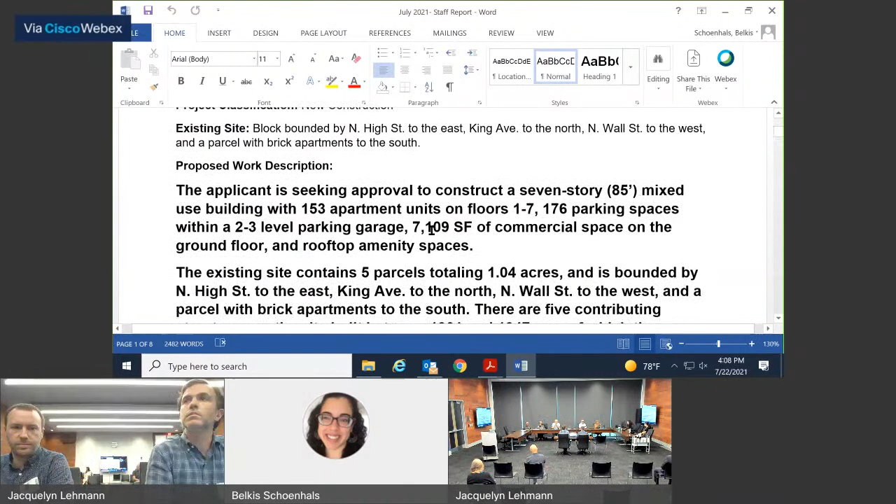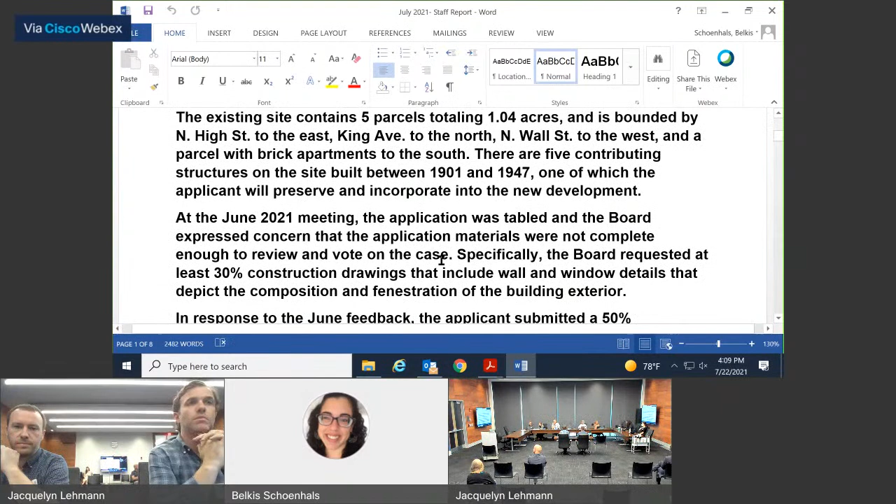So for this case, the applicant is seeking approval to construct a 7-story, 85-foot mixed-use building with 153 apartment units on floors 1 through 7, 176 parking spaces within a 2 to 3 level parking garage, 7,109 square feet of commercial space on the ground floor, and rooftop amenity spaces. The existing site contains 5 parcels totaling 1.04 acres and is bounded by North High Street to the east, King Avenue to the north, North Wall Street to the west, and a parcel with brick apartments to the south. There are 5 contributing structures on the site built between 1901 and 1947, one of which the applicant will preserve and incorporate into the new development.

At the June 2021 meeting, the application was tabled and the board expressed concern that the application materials were not complete enough to review and vote on the case. Specifically, the board requested at least 30% construction drawings that include wall and window details related to the composition and fenestration of the building exterior.

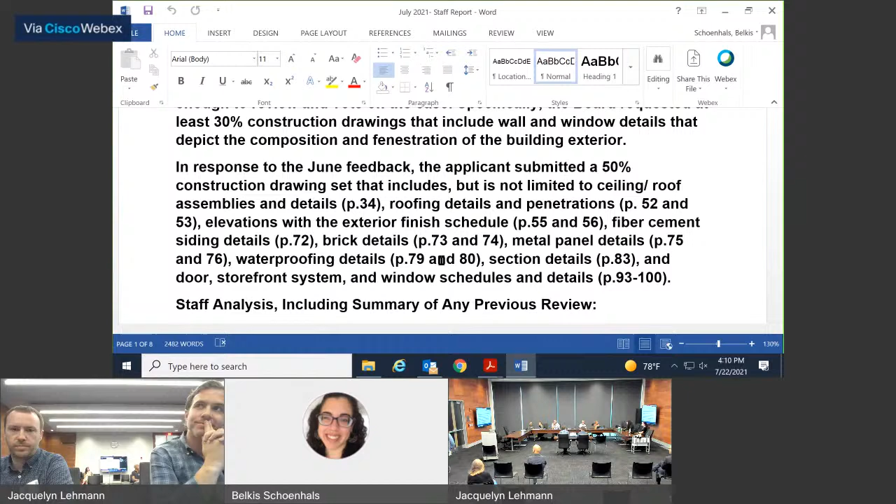In response to the June feedback, the applicant submitted a 50% construction drawing set that includes but is not limited to ceilings, roof assemblies and details, roofing details and penetrations, elevations of the exterior finish schedule, fiber cement siding details, brick details, metal panel details, and waterproofing details, section details, and doors, storefront system, and window schedules and details.

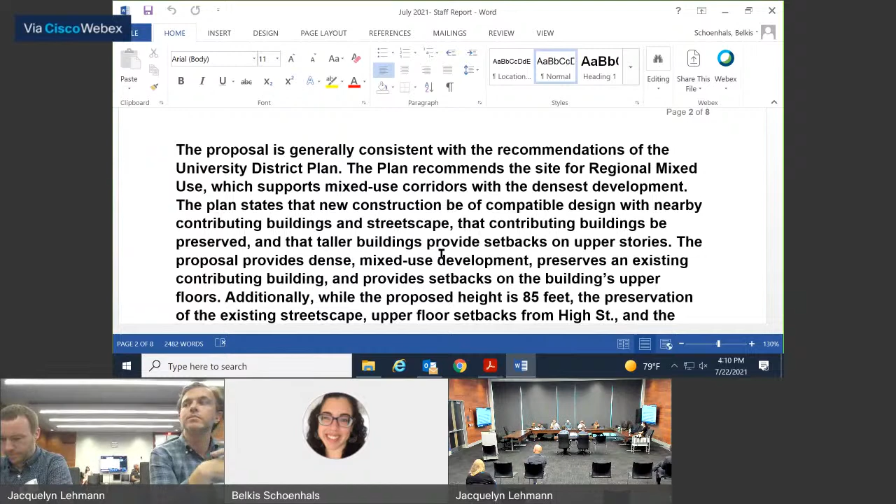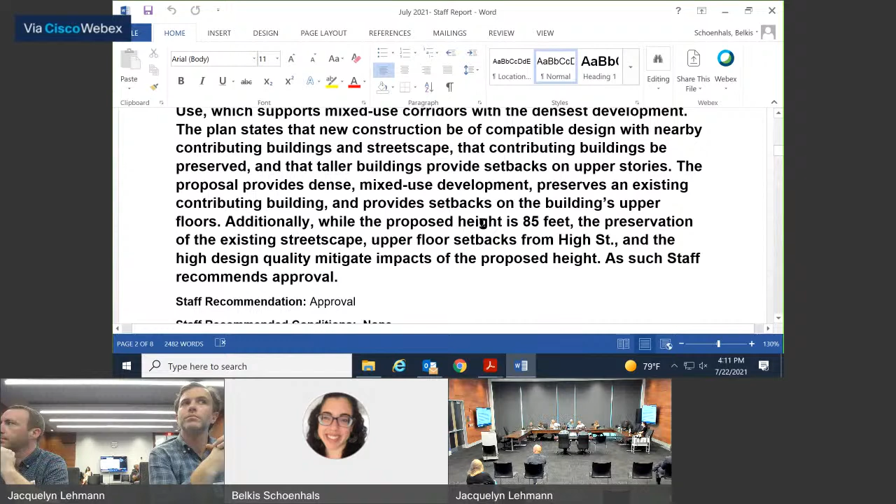After review of their 50% construction drawing set, the proposal is generally consistent with the recommendations of the University District Plan. The plan recommends regional mixed use for this site, supporting mixed use corridors with the densest development, and states that new construction be of compatible design with nearby contributing buildings and streetscape, that contributing buildings be preserved, and that taller buildings provide setbacks on upper stories. The proposal provides dense mixed-use development, preserves an existing contributing building, and provides setbacks on the building's upper floors. Additionally, while the proposed height is 85 feet, the preservation of the existing streetscape, upper floor setbacks from High Street, and the high design quality mitigate the impacts of the proposed height. As such, staff recommends approval. Thank you.

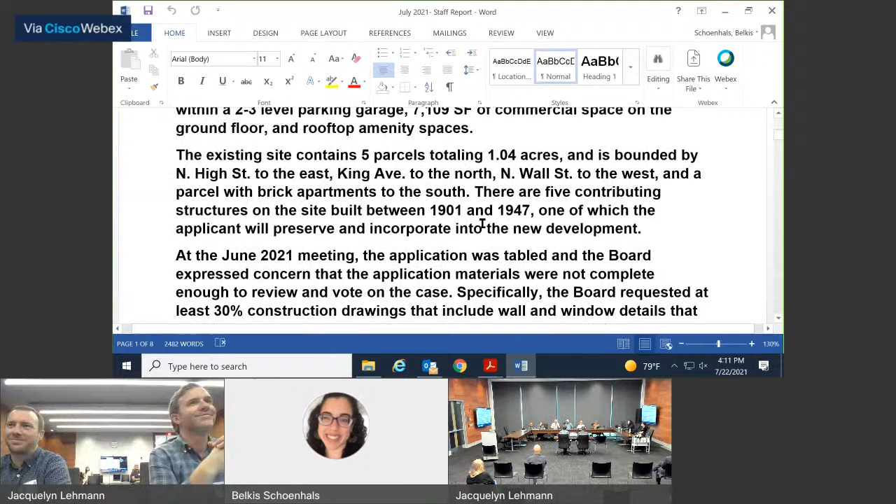What I would do right now is ask the applicant to show us what they have added since last time, and hopefully it will be put up on the screen. If you could sort of, oh, 141 pages, yes, if you could limit yourself to the details of the exterior, per the specific request of last month, so that we don't have to go through 150 or however many pages there are here, that would be wonderful. Please. Absolutely, absolutely, complete but short.

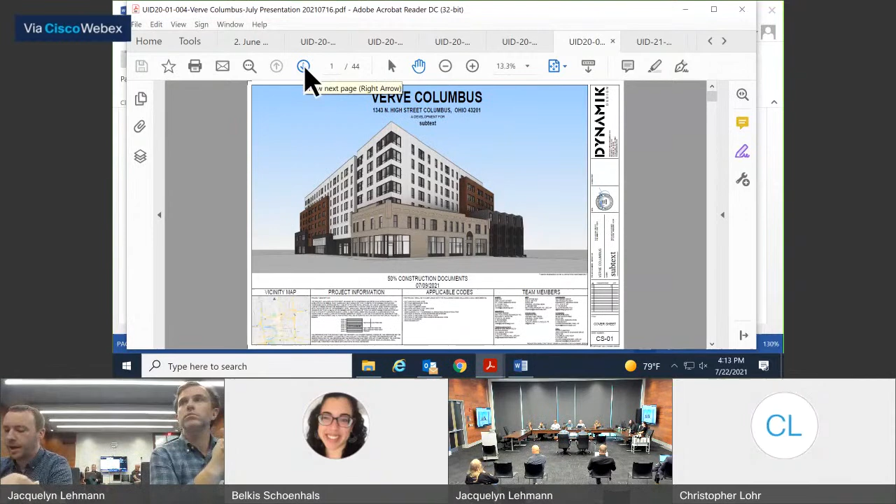Part of the challenge with assembling a presentation like this, where we're extracting the construction documents and trying to tie it into the aesthetics of what was presented before, means that we're going to be jumping around a little bit between how the set is organized. So I'll mention the page numbers, because you can just jump back and forth between them. So let's start with page 41.

Is it 41 on the construction set, or is it 41 on the presentation set? 41 on the presentation.

Just to recap the elevations, how the building is massed, where the weight of the building is with the materials, the brick, the existing building - these are the same documents that were presented before. The building facade design has not changed.

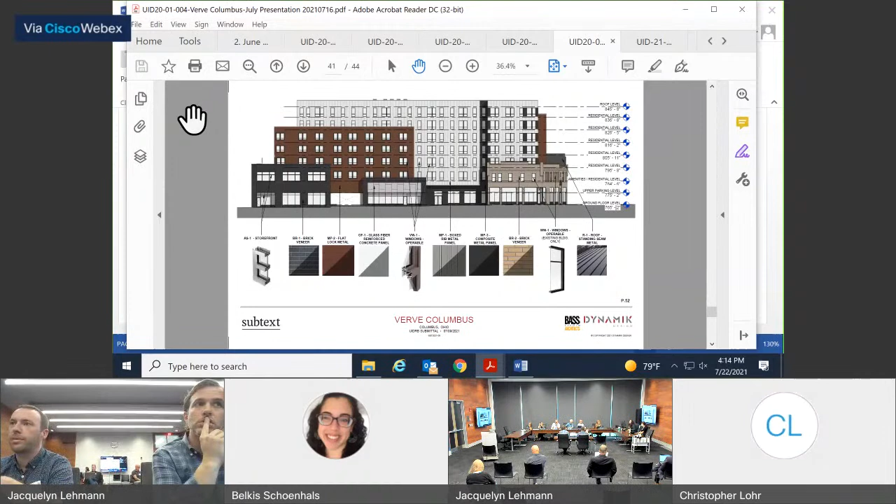If you go to the next page, you can see that's also presented before, calling out where the different materials are used throughout the project. So then if you will go back to page 15.

Which is the construction document elevations. This is the supplement that was - yes, this is the 44-page supplement.

This is Scott, I just want to clarify. So they have a 50% CD set, and just so I didn't have to scroll between 100 and whatever pages, they just extracted roughly 40 pages of the CD set. The problem is we don't have those. Oh, they're right here, and they're uploaded to Box as well. So the full construction set was uploaded to Box, and I have it here.

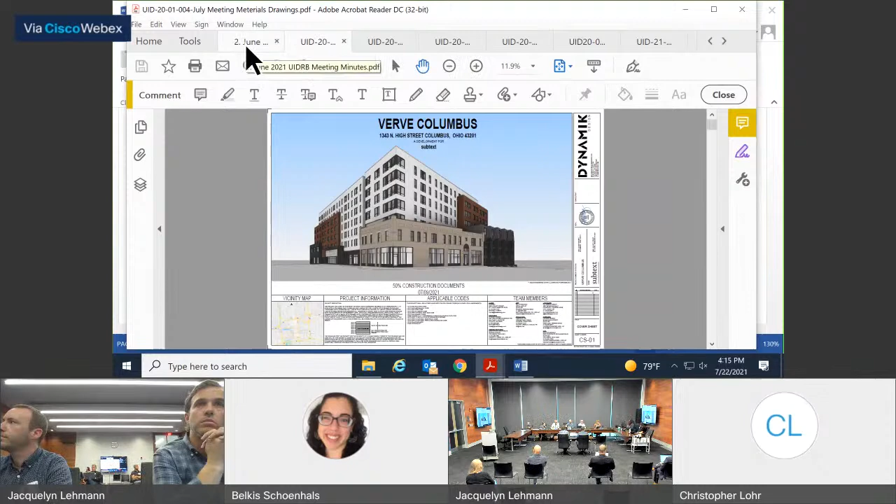What's it called? What's the file called? It should be UID dash 20, that's the case number, and then it says meeting materials. Give you the case number, so it should say UID dash 20 dash 01 dash 004 meeting materials. And that's the full construction set, but just for the purpose of today's meeting, we've extracted about 40 pages just to quickly flip through. And that's a file here also? No, it's just for use for the meeting, but there were saved pages, so you'll put them up there, right? Exactly, that's what we do.

So as I was saying, these are the construction document elevation pages, and we included them so you can see, compare between what was presented before and what we have now. They are the same building - we're not changing any of the design elements, we're just adding additional documentation.

So if you go to the next page - Belkis, that's the lighting exhibit. So go to the next page, and then that's the last of the elevation pages. So go to page 2, please.

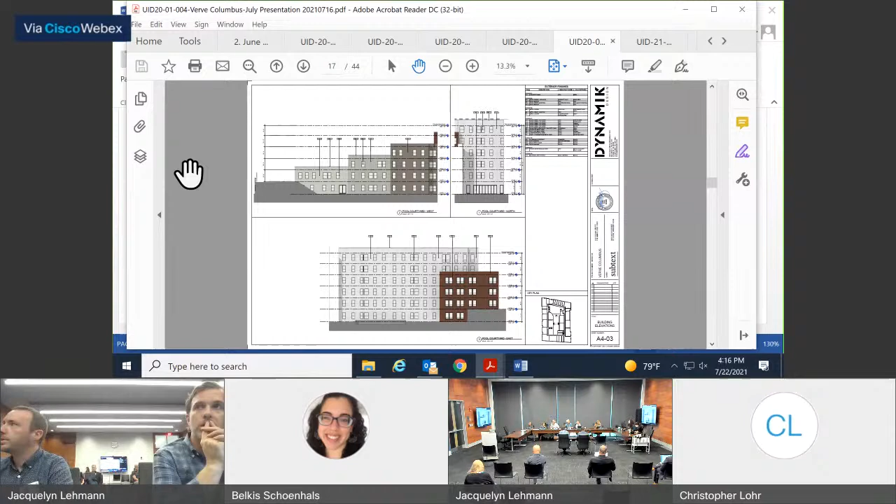What we've done is organize this - we included some of the landscape and building plans, but these are the scope of the elements that we were asked to address in additional detailing. Some of the roofing details, wall sections, including where different specific details occur, exterior material details, whether they're typical or specific to this project, and then our door, window, and storefront head and sill details. So that's what we've extracted from the overall construction document set for you to look at tonight.

So then if you'll go to page 18. In this set, we've extracted our partial elevations and wall sections from which we call out in large details of all the various penetration conditions. I think the most relevant are the ones related to the windows and material transitions. So if you'll go to page 36.

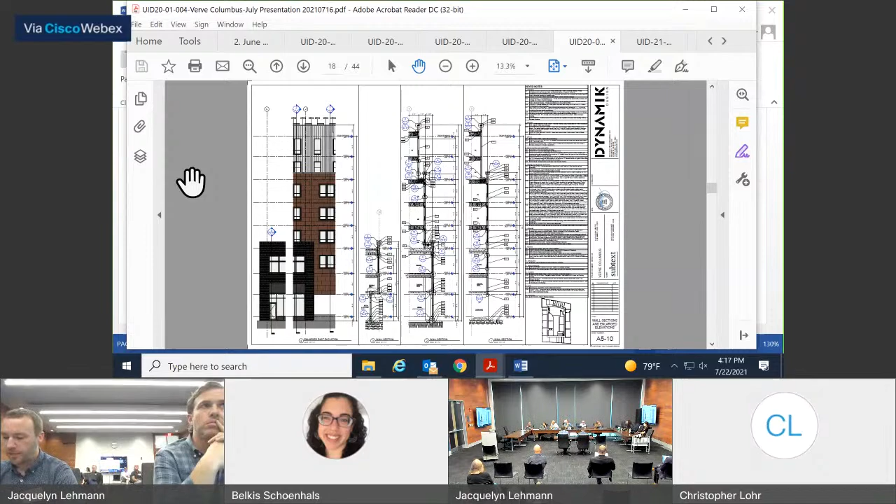Before I get into the actual details, just to orient you, because some of the numbers may be hard to read, the way we organize our sheets: when I say detail 1, 2, 3, 4, that's starting in the bottom right corner and going up the page. 5, 6, 7, 8 is the second column over, going up the page. Just a visual so you know where I'm talking about on the sheet as we go through it.

On this page, the first column on the right are our recessed nail fin windows at the brick materials, so you can see the recess with the nail fin back at the face of sheeting. Details 5 through 7 show a recess with a 2x4 furring strip to provide an additional recess for the nail flange windows at the fiber cement facade materials. Details 9 through 11 are the nail fin windows at the box rib, which is a little different, and I'll come back to that. Details 12 through 14 are the recessed nail fin windows at the composite metal panel.

So the brick detail windows are recessed, and the fiber cement and metal panel material windows are recessed. At the box rib panel, because it's a different facade material, we have more relief in the actual facade material, so the window there is not recessed as far. We've created a shadow line with a flange around the window itself to continue that same shadow pattern. But in all, the windows are recessed, with that exception at the vertical corrugated panel.

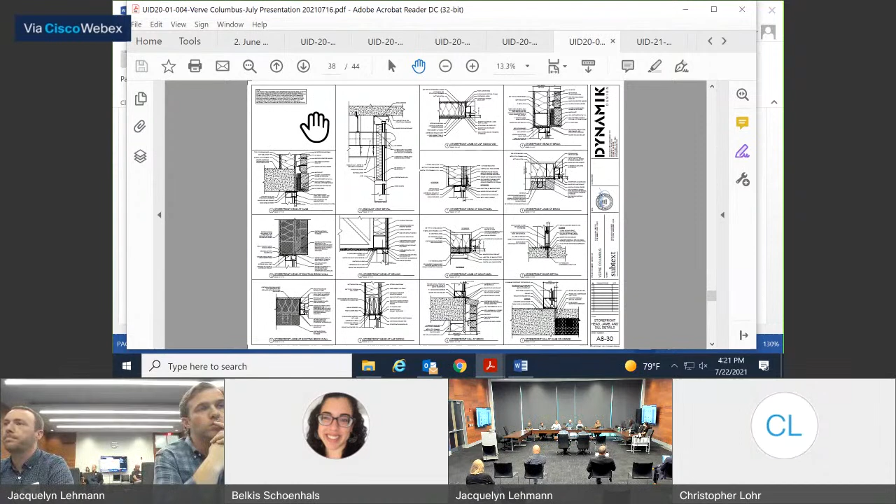A823, and I'm looking at a sill that is a 5-quarter board, appears to be on the outside. You're using cement board as a sill? Which detail is that? The one with window sill and fiber cement panel, A823. The window itself is not fiber cement, no. Well, it's called out as trim board — what is that? It's called out as trim board, but it'll be a composite material instead.

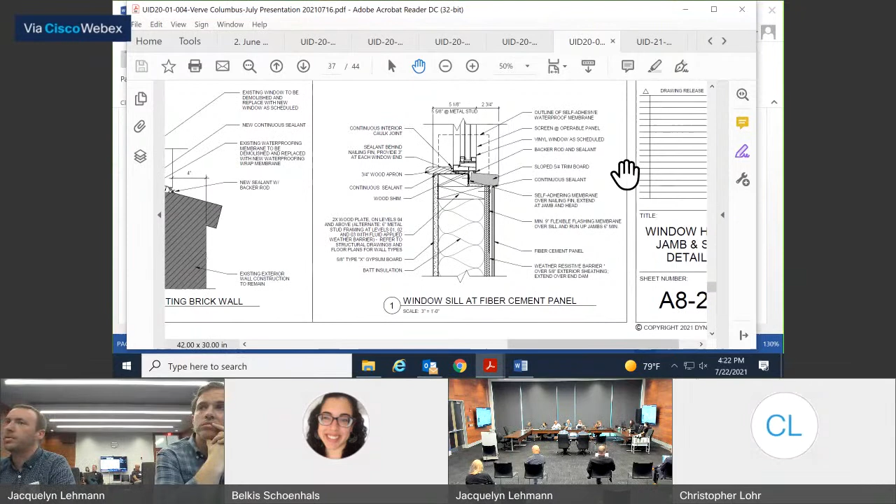Okay, keep going please. And then if we go to page 34 — that is sheet number what? That is sheet number A8-11. A8. And these are the door details showing similar recesses of the brick. We don't have very many doors, or any doors really, in the metal panel portion component, so this is to show the doors.

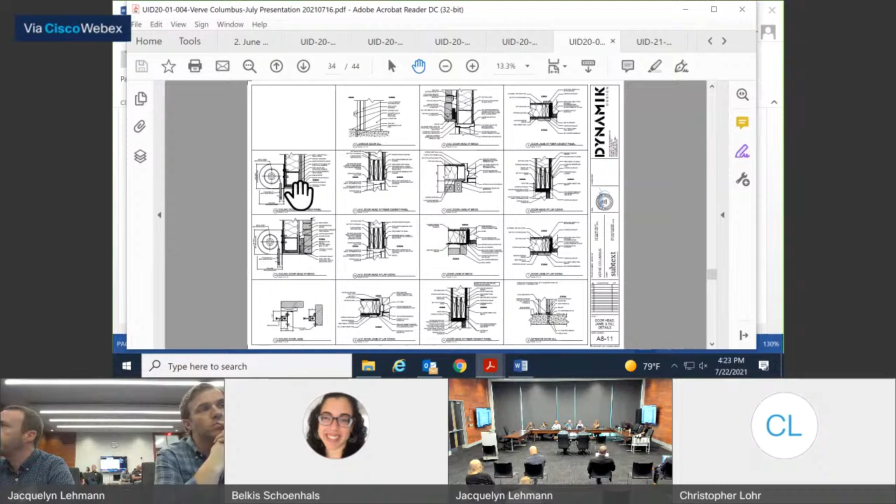Detail 15, the coiling door had an FCM panel — that's your metal panel system? That's correct. What's the gray box? At the coiling door or at the typical door? It's a fiber cement piece on the underside, so there's gypsum wrapping around the underside of the steel jamb or steel head.

Is there metal panels on the side? Yes, it's about 75%. There's the vertical corrugated metal, and then there's a flat lock brown metal panel that's in a running bond pattern, and then there's the corners.

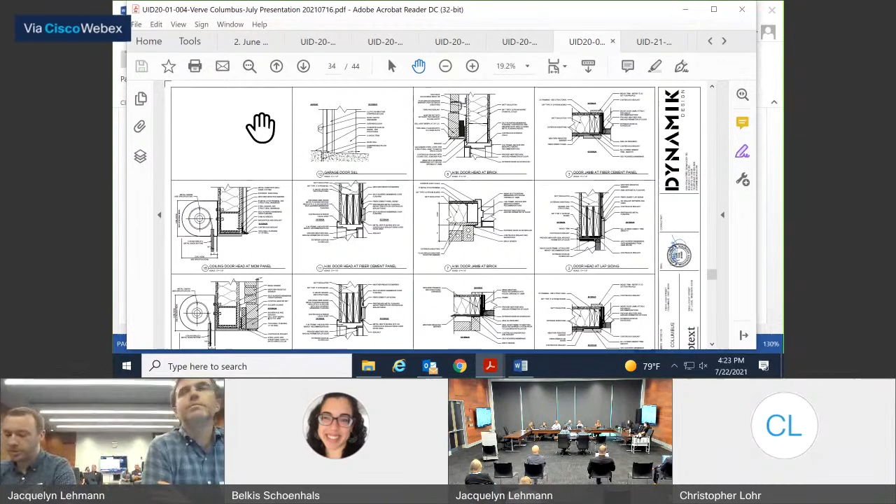Can you show us the corners? No, I'm coming to this. I was going to go into our typical material details. I just wanted to address the windows and penetrations first.

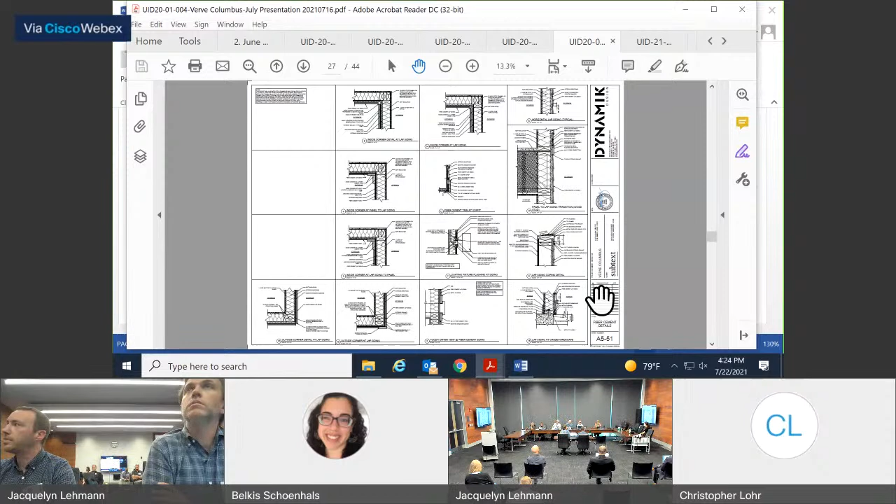If you'll go to page 27, which is sheet A5-51, yes, these are our typical fiber cement details. You can see in plan on details 9 and 10 the typical inside and outside corner. We don't have any fiber cement soffits on this, so those aren't included, but there are typical penetrations and flashing details that are for industry standards.

If we go to the next page. Hold on, outside corner detail at left side, oh it says left side. Yes, right, go ahead, the next page please.

Which is our brick details, similar approach to how the sheet is laid out and seeing some of the transitions. You'll see in the bottom left corner where brick terminates vertically against another material, how we're doing the transitions. And then also some additional breakaway details for waterproofing and patio transitions, since a number of the materials stop above grade.

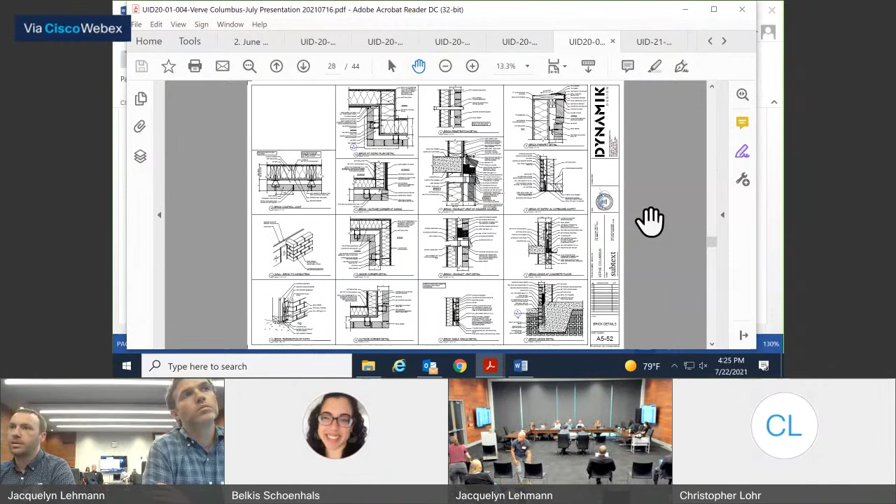If you'll go to page 30, which is A554 I believe, yes. Those are our composite metal panel details. You can see similar inside and outside corners where we have the trim piece that's by the same manufacturer as the metal panels themselves, so it's an integral assembly arrangement.

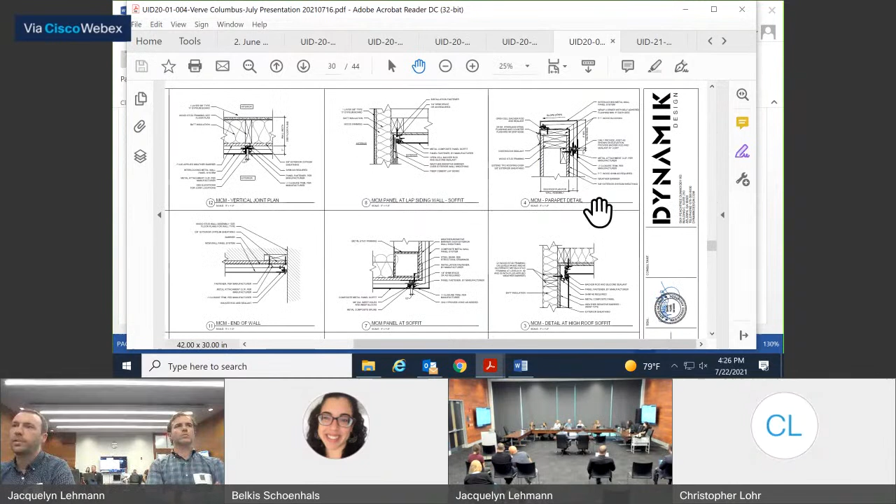In particular, I want to call out detail 4 at the top right corner of the page where we have our metal panel parapet coping. So the metal panel itself terminates at the top of the wall - it's the smooth metal panel, the darker brown, down at the bottom. Higher up where we have the box rib, we have a more conventional metal coping since there's not a way to wrap the corrugated metal and bend it around the top of the parapet.

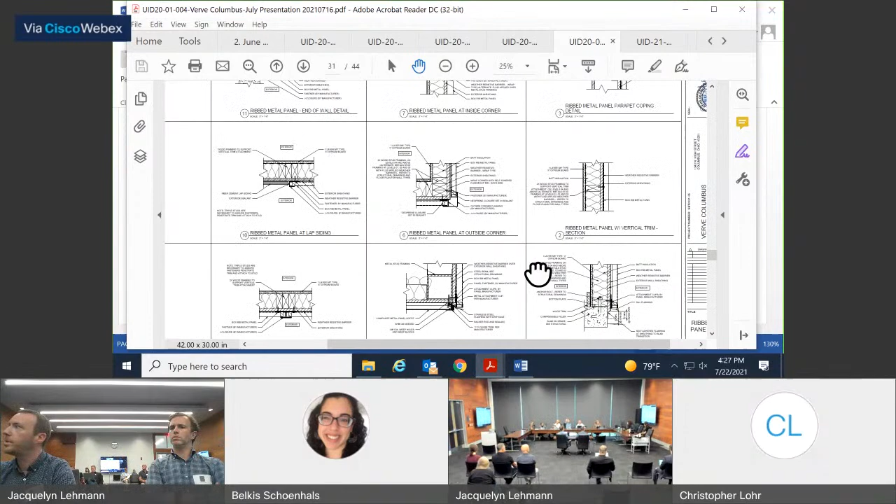And you'll see that on the next page, page 31, which is the box rib, the vertical corrugated metal panel details. Similar approach to design with the inside and outside corners. There's a prefabricated piece that terminates at those conditions - you'll see on the two middle details at the bottom of the middle column. And then at the parapet coping, the third detail up on the right column, where we have a typical metal coping to terminate the vertical corrugated beneath.

All right, so at your outside corners you're doing a piece of trim metal. That's correct, and it's in the same color and finish as the box rib.

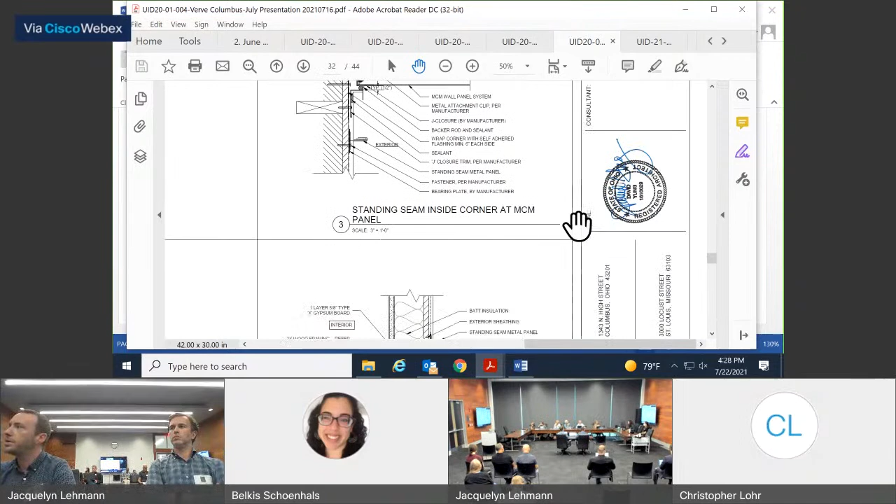If you'll go to the next page, page 32 - these are the standing seam metal roofing details that we have at the mansards over the townhomes, including the ridge and flashing details, and then typical inside and outside corners where we're making the transition to the smooth metal panel and changing the orientation because of the way the sloped pitch roof of the mansard dies into the vertical of the adjacent wall.

And then last, if we go to page 33 - there have been particular specific requests for details of how and where the planters that are on the roof facing towards Wall Street are incorporated. So the two details on the right side of the page are at the lower level, basically directly above the parking deck, where there's a cast in place structure, and they're attached to the back face of that parapet wall so that the plantings can cascade over the edge as shown in the renderings. Those are in prefabricated FRP boxes that are attached, sitting on shelves and attached to the back face of the cast in place parapet wall. Irrigation - yes, they are irrigated.

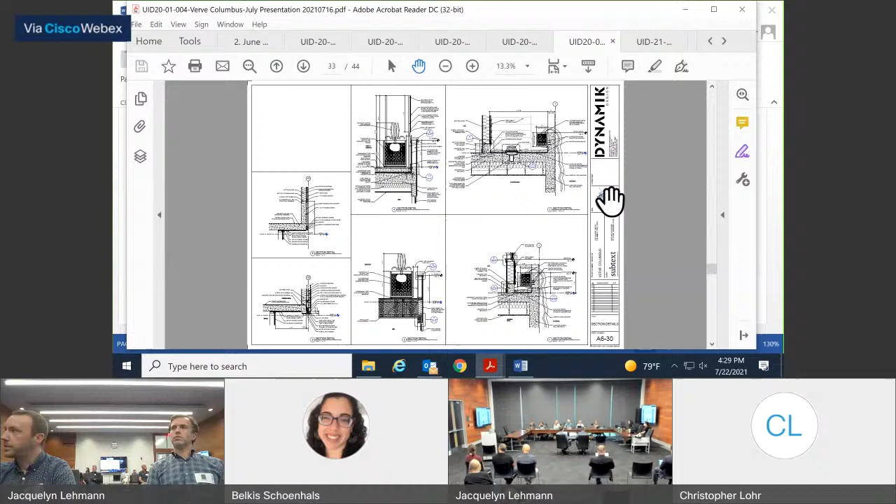And the two details in the middle of the page are the elevated roof. The one that's sitting up there has slightly larger boxes with bigger plantings in them, shrubs and grasses, and they're sitting on the split slab at level 4. Then the one below that is up on the roof that steps up vertically along Wall Street, and is carried to just above the parapet to ensure that the screening and greenery is actually visible from the street, as was shown in the renderings. If you'll pan up on the page to the detail directly above that.

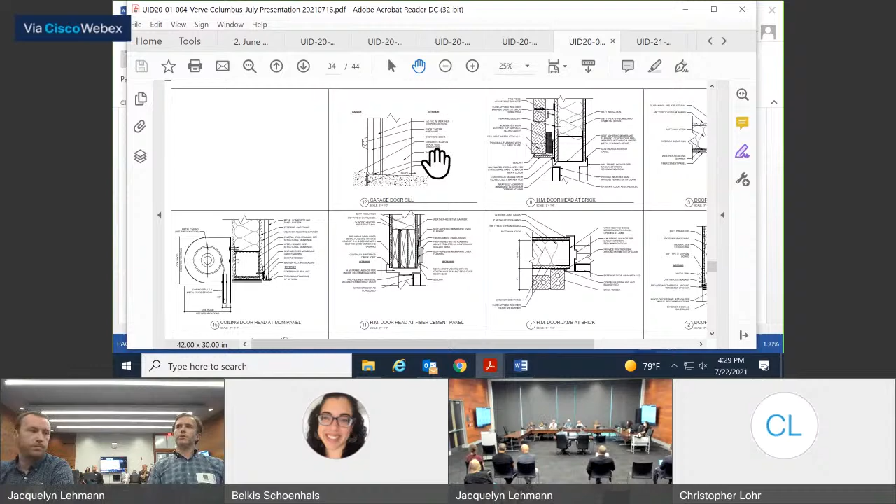And just to make a note on those, we're working with Denison Place to select plants. There could potentially be a revision just to increase restricted views into the neighborhood from the courtyard. We've also made a modification here to increase the height of that screening wall from 7 feet to 8 feet per the request of the neighborhood. As Brian was saying, it's a little thin because it's a narrow element, but just to the right of that planter you can see a detail for the perforated metal screen that runs along behind the parapet as well.

And that is the bulk of it. You're welcome to ask specific questions if you have them, I guess. Yeah, I'll have a few. I think there's a speaker on public comment.

I'm Kathy Fox, representing the Denison Place Neighborhood Association. We respectfully request that the conditions for approval of this project include the following for the outdoor amenity deck: the material for the perimeter screen should have acoustical dampening properties; the amenity deck should include the planters and screen along the west parapet wall and the south parapet wall on the amenity deck; and the plants to be installed in the planters along those same two parapet walls should be plants that will grow taller to make an effective screen. The developer has told us that these details will be included in the project, but the drawings you've seen today do not yet reflect all of these items. So we're respectfully requesting that they be included as conditions to the certificate of approval. Thank you very much for your consideration and your detailed review.

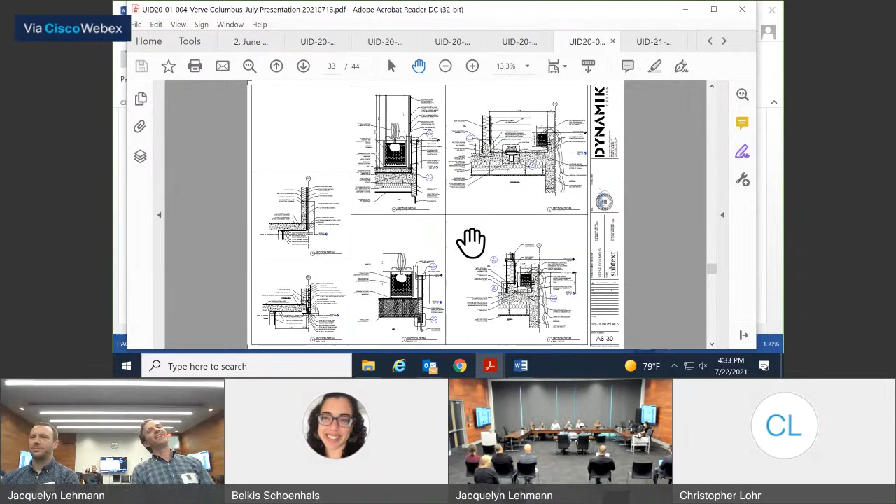And it wasn't going to be approved. I'm sorry, Frank, could you speak up a little bit? Oh, we could do that. Well, I'll do it. No, I commented to the applicant that this project started in person in this room, and that it was never going to be completed until we were back in this room. All of COVID was just waiting time till we could meet again in person. And yet in the meantime, they did a lot of work. Of course. So Frank, you're saying this project is bookended both by the pandemic and the vaccination? Yeah, that's correct, that's correct. We better approve it quickly because who knows?

Okay, so I would say our window is fast closing. I have no comments, other than that. I have no comments.

No, but the only comment slash question is the screening on the west. I have less concern about because if you look at what's occurring across the alley to the immediate west, it's garages, so. But I think if the intent was to have larger stuff, and I looked at the section of the planting volume to accommodate vines, they're presumably going to drape over through the building. And I can't remember, as the building steps down, does it have a similar planting condition? So is the section on the inside similar every place? Now you've got the larger planters that sit on the deck to accommodate shrubs, but for the vines it's a smaller container, as it were. That's correct. Okay, because I'm just saying the smaller containers are not going to accommodate. Oh, the intent is just for the vines, for the smaller container. We're talking about the separation from really the south, where it'll be... It's the south, pretty much the south and the neighborhood, but on that amenity deck level.

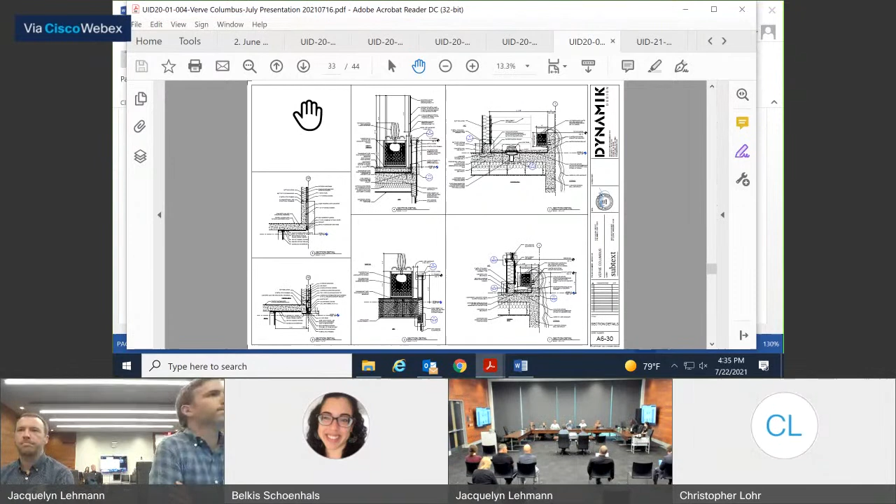Before I make the motion, Bill or Steve, do you have the text to the amendments that were passed and seemingly accepted? Yes, you do. Okay, I move that we finally approve as submitted with conditions as agreed upon between the neighborhood association and the developer.

So second. I second. All those... Carrie, second.

Then I'll call the roll. Mr. Fleming, yes. Mr. Grado, I recuse myself. Ms. Jones, I support. Mr. Petrozello, yes. And Ms. Bucksauer, yes. Thank you.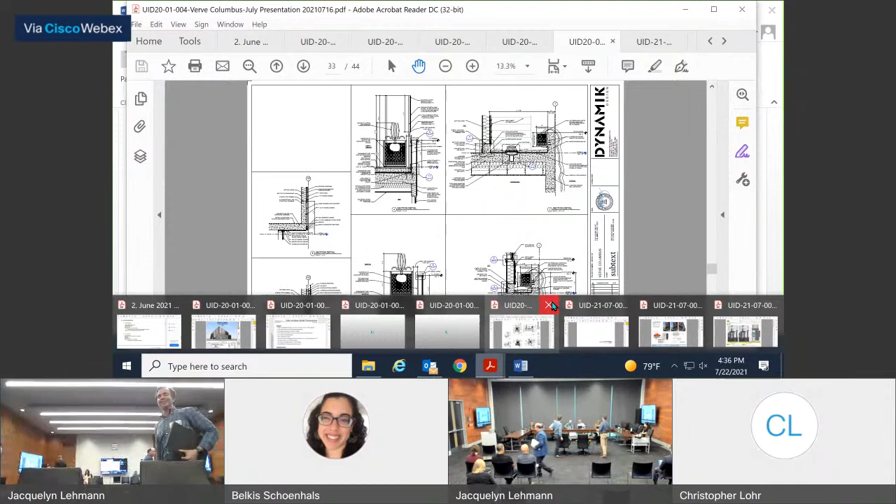Thank you all. Next project, we want it to be more efficient. It will be, I promise. We will be back. We don't want to assume that all this time was wasted in training. It was a great learning experience. So come back. We will. Thank you, everybody, appreciate it.

Mr. Hodge. Well, Mr. Hodge is not nearly as entertaining on webcam, so it's nice to be back in person. Happy to see people. I think I got it.

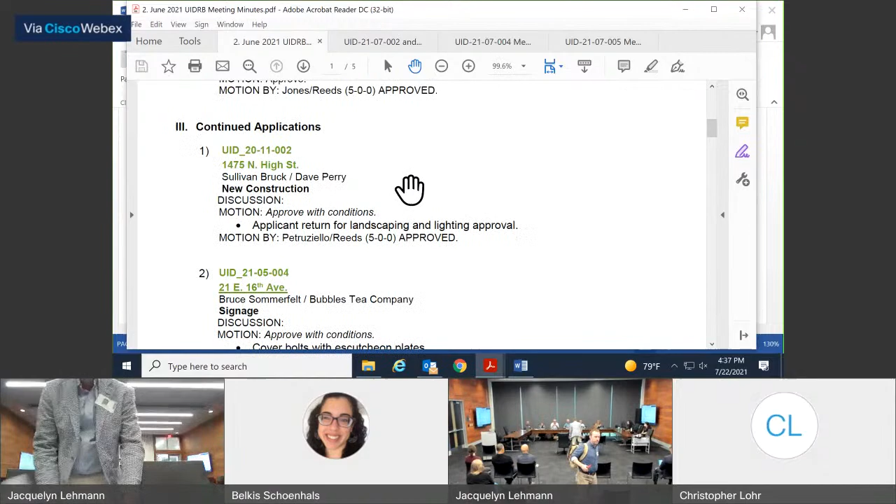All right, UID 2107-02, 13th Avenue, patio extension and variances. Help us out. And this report will also include UID 2107-03 for the design as well.

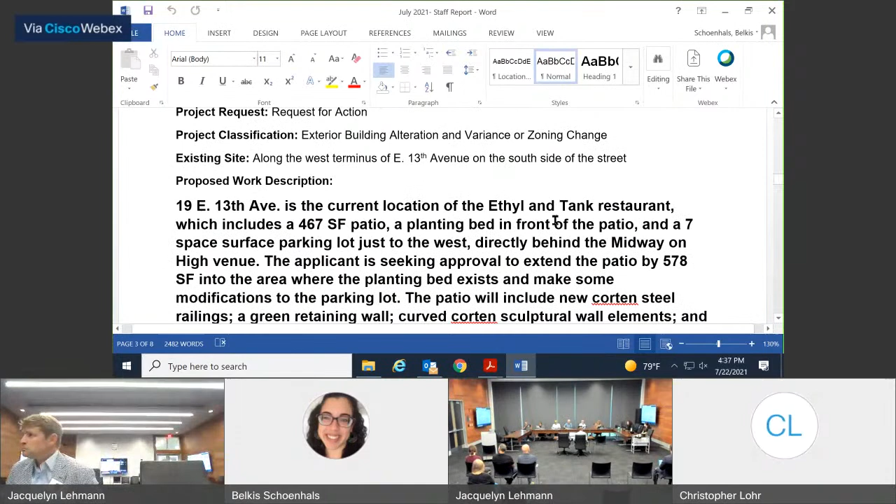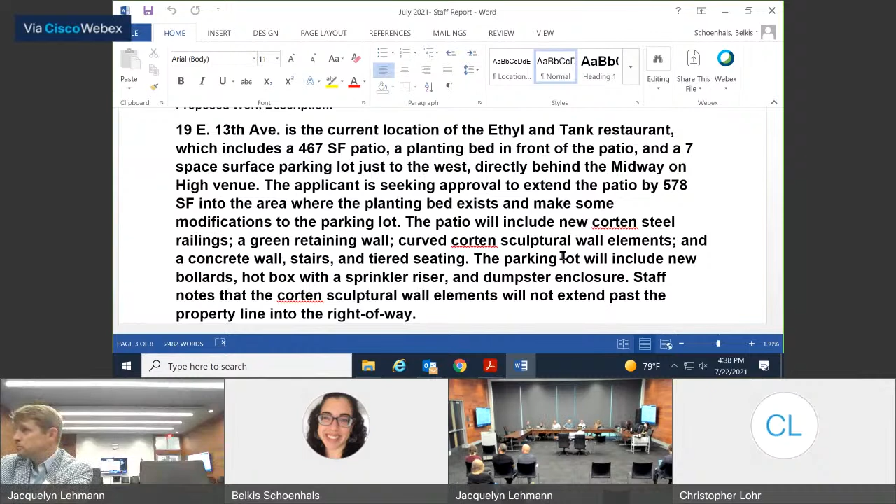So 19 East 13th Avenue is the current location of Ethyl and Tank Restaurant, which includes a 467 square foot patio, a planting bed in front of the patio, and a 7-space surface parking lot just to the west, directly behind the Midway on High venue. The applicant is seeking approval to extend the patio by 578 square feet into the area where the planting bed exists currently and make some modifications to the parking lot.

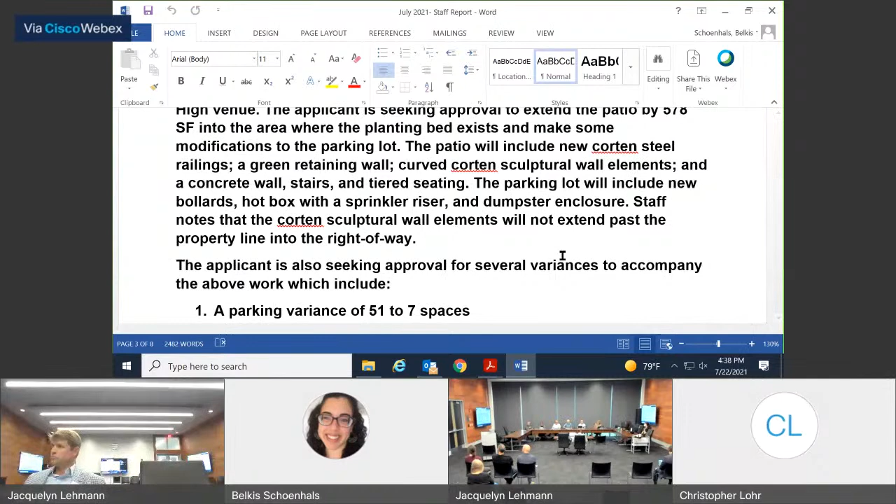The patio will include new corten steel railings, a green retaining wall, curved corten sculptural wall elements, and a concrete wall, stairs, and tiered seating. The parking lot will include new bollards, a hot box with a sprinkler riser, and a dumpster enclosure. Staff notes that the corten sculptural wall elements will not extend past the property line into the right of way.

The applicant is also seeking approval for several variances to accompany the above work, which includes: 1, a parking variance of 51 to 7 spaces; 2, reducing the loading space requirement from 1 to 0; and 3, reducing the parking lot driveway and East 13th and North Pearl Street clear vision triangles from 10 to 5 feet.

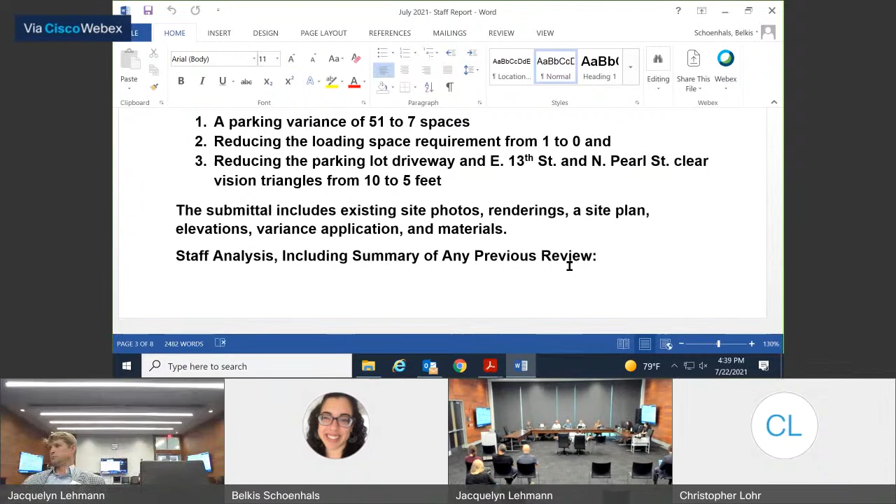The submittal includes existing site photos, renderings, a site plan, elevations, variance application, and materials. After reviewing the application, the proposal is generally consistent with the recommendations of the University District Plan. The plan recommends that development enhance the unique characteristics of the district and that outdoor dining not create visual or physical obstacles to adjacent buildings, streetscape elements, and pedestrian travel. Furthermore, the plan states that parking variances may be reviewed with consideration of the presence of on-street parking, extent of the variance requested, size and nature of use, and potential impact on adjacent residential uses.

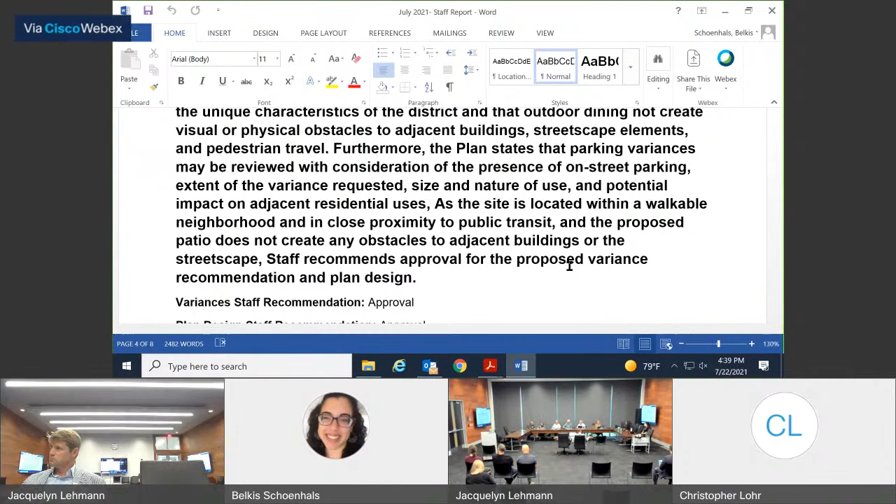As the site is located within a walkable neighborhood and in close proximity to public transit, and the proposed patio does not create any obstacles to adjacent buildings or the streetscape, staff recommends approval for the proposed variance, recommendation, and plan design.

Thank you. All right, Mr. Hodge, you want to tell us about it? Yeah, David Hodge, attorney for the applicant, and I think I'll just stand on the staff's report.

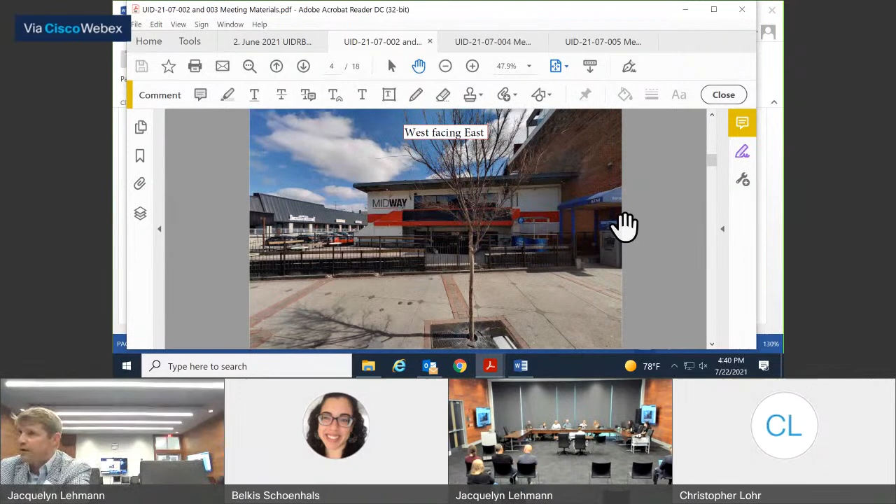Well, so I am actually grossly unprepared to talk about the COA component of this application. The architect is unavailable to be here. I think I'd rather just postpone that until next month when they're able to be here, and I'd like to be able to get a recommendation on the variance request from the board. Who's the architect? Tim Lai.

So we're only talking about the parking variance. And really, the parking variance, as I said last night to the University Area Commission, which turned this down by a large majority, even though that's a bunch of zoning gobbledygook—it's really 2 parking spaces we're talking about here. A 600 square foot patio requires 2 additional parking spaces.

This is Midway and Ethyl & Tank. That parking lot between those 2 uses is already grossly inadequate to serve both of them, in terms of the code, but really this is a pedestrian part of town where students are walking to drink and people who live in the neighborhood are walking to drink. So really, this is 2 parking spaces, and we want to convert the patio right there where you see that green wall by about 600 square feet. I don't have any spaces. You should note that in your letter at paragraph 4, there's a pretty significant typo.

You'll certainly want to correct that because your name is signed on a document. If we're only discussing the parking variance at this point, that would be the article of vote on.

But it might be useful to carry information back to the architect that there's some concern about the stair as a design element. I raised concern about its safety, and people are drinking on the seated area and in the step area. What's to protect people from falling down the stairs? So I'm not in support of that at this moment.

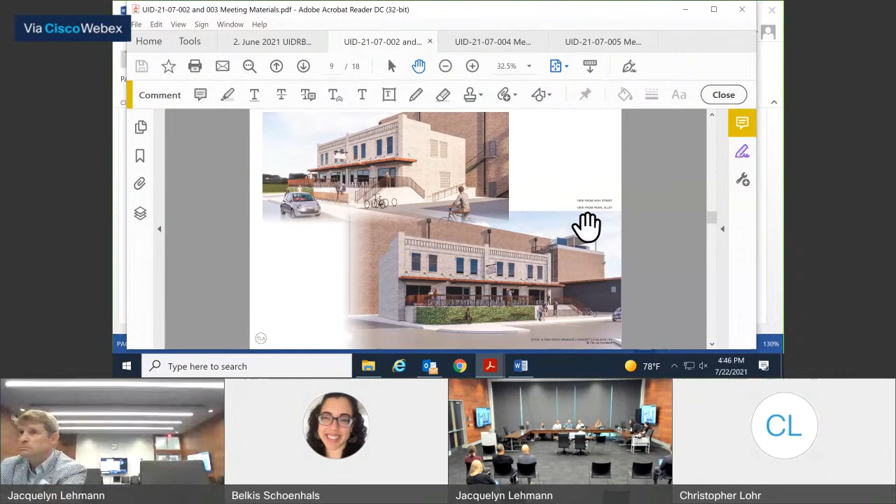Can I request that the board just vote on my variance requests? What are the variances aside from parking? So it's vision clearance at the parking lot, the sight triangle at the alley, which is a technical issue because the alley's one way east, so we're not really in any vision clearance since cars aren't coming westbound through that alley. Backing out of parking spaces, people will be coming off High Street turning right. No, you can't, it's blocked at High Street.

And so when we went back and wrote this up and visited with zoning clearance, we had to come up with the total parking required for Midway, the total parking required for Ethyl & Tank as a bar/restaurant, the existing parking spaces in that lot, and then do a calculation based upon the administrative parking section of the code to determine what would be needed in total for those.

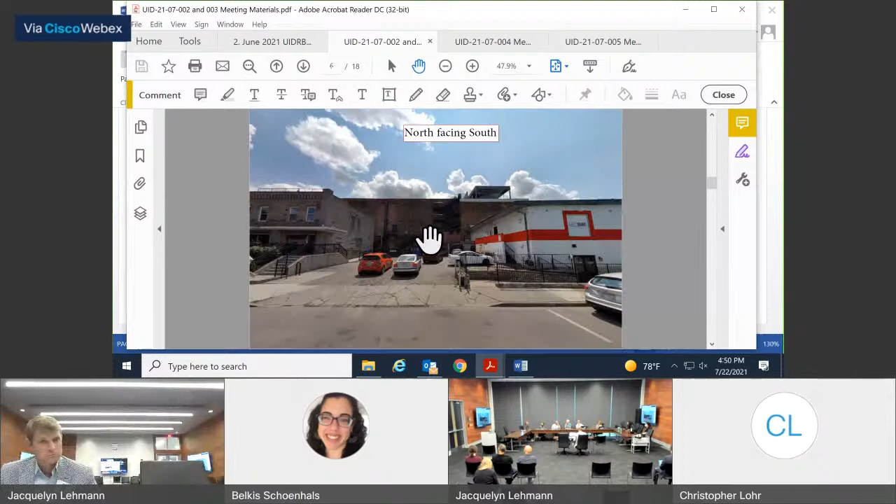So what we did - this board did - is develop that landscaping scheme across the front of the building so that the outside seating could be limited to a type of seating and density that would be complementary to an upscale restaurant. And that's the way it was being used until it was purchased by Midway.

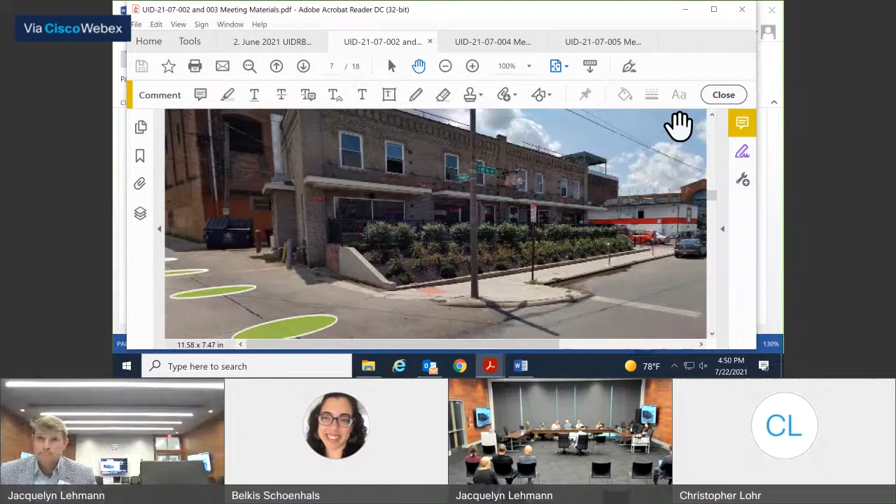And now the use has changed dramatically. What was - so it's Ethyl, same restaurant, but changed ownership? Yes. So what was the upscale restaurant? The upscale restaurant was Ethyl & Tank. The name stayed the same, the ownership changed, okay?

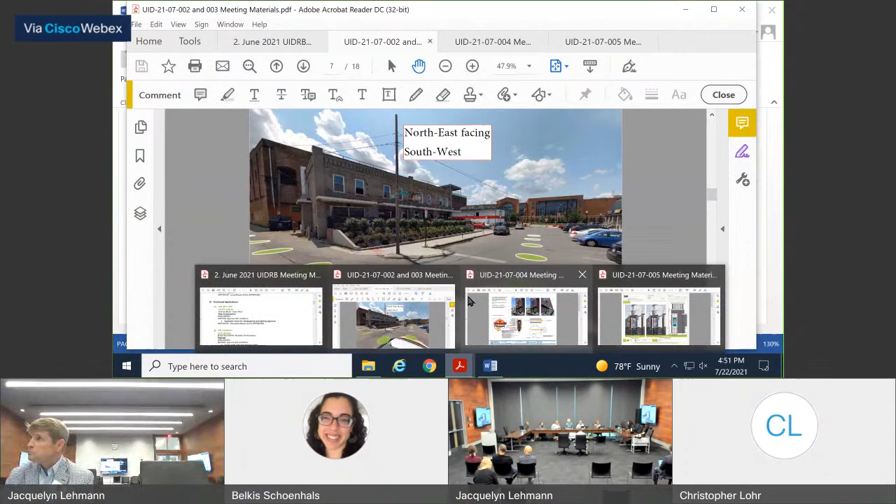So if you look, the seating outside, based on this board's input, was what you see here. If you could flip to the proposal - okay, give me the front view.

Okay, if you look at what is being proposed with bleacher seating along that other end, that density does not complement a sit-down table type density. Okay, keep going.

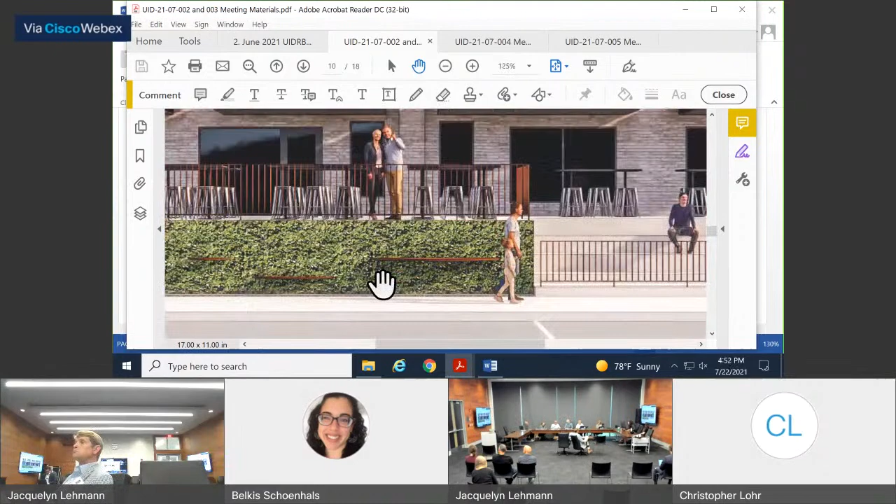Then if you look at what's being proposed on the green wall, there's even seating that would be in the public right of way, because of what we've been experiencing during the pandemic and prior to - with the lack of supervision of the outside patio area at Midway, the illegal use of the parking lot as a place of assembly, and then ultimately that flows all into the street. This proposal is just going to exacerbate that situation.

I don't know if I can add - sorry, this is Dab, I just wanted to clarify. So just so everyone knows, the Corten wall sculptures do extend out, but they are within the property line and don't go into the formal right of way. So physically they do pull out, but in terms of property, they are within the property line. Yeah, that wasn't my issue, but thanks for pointing that out. The issue is if you look, there's a person seated on the seats.

If I can add something from the area commission last night - the vote was 11, there were 11 people, we had quorum, 8 against and 3 in favor of what Mr. Hodge presented. I think from the area commission perspective, it's probably best to state that this is complicated by the lack of supervision.

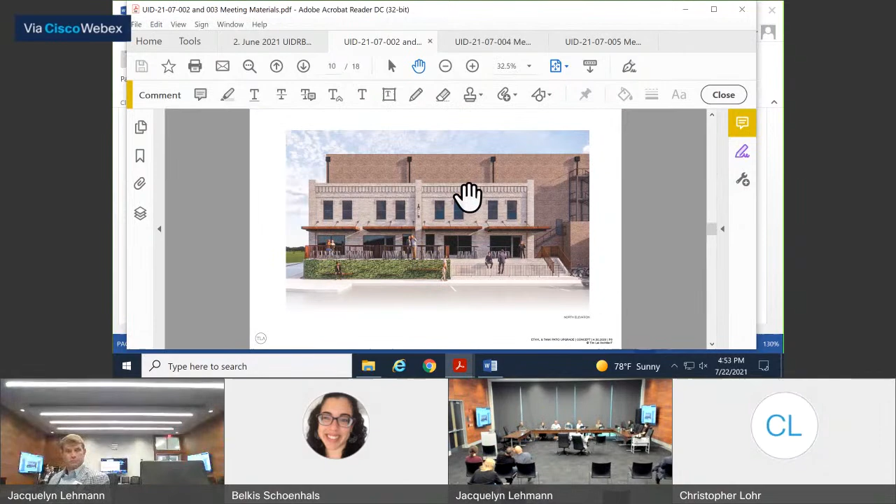Including some issues on what was proposed at Midway, because we know the two properties are closely tied, where there was exterior modification taking place. Am I right, David? And that has to be resolved here because the Chastity Minor was there from City Attorney last night. I think for the area commission, that becomes another part of the issue.

Even though Mr. Hodge made one of the most eloquent arguments for a drink and drown bar - those were your words. Yeah, those I had ever heard. So I do have to say, I think you got 3 votes last night for that one. And 3 people who were angry at the remainder of you, but that's politics.

So remind me, what's the zoning inside? I think it's a straight C4. What are allowed uses? Everything you can fathom. So is the use somehow not compliant? The use is compliant. The use is compliant.

The use is compliant, but the extenuating circumstances seem to indicate that the applicant, not the lawyer, cannot always be trusted. So let me, Doreen, would it be okay if I sort of say the same thing you just said, but in David Hodge's words instead of Doreen's words? I'm sorry, did you say one more time?

Would it be fair if I essentially say the same thing you said in my own language? Yes. Okay, the way I would say what Doreen just said is this.

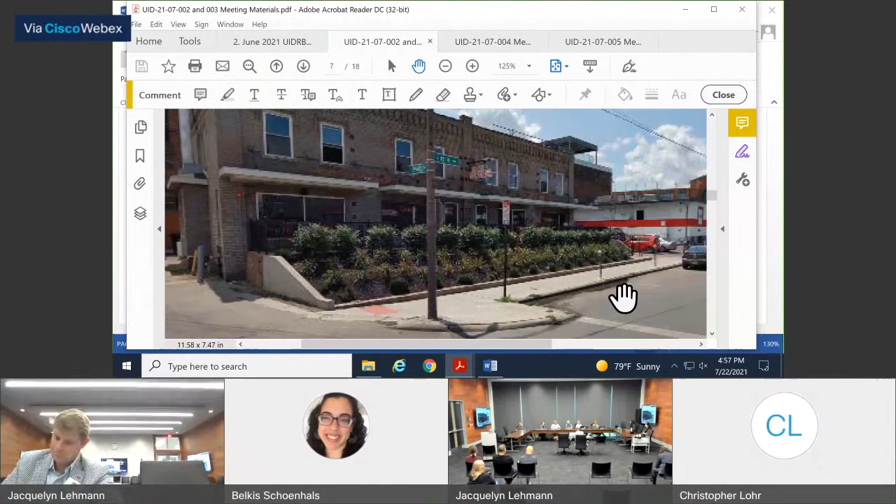But the scheme I'm looking at here is a concrete jungle. I'm looking at the square footage of the flat area, it's 578 square feet, but then there's no square feet noted for the stepped area. So do you get a pass on that? Or how about the square feet of the stepped area? So it looks to me like you're more than doubling the size, more than doubling the size of the existing patio, and pretty much just paving the whole thing.

And in no amount of, that green is not green, that's fake, right? That's some sort of photographic something or another, or whatever it is. I don't know what live, the intention is to make it alive. Yeah, on the north side. So I don't find any, believe me, it has nothing to do with it, because I don't know anything about the way it's operating or anything like that. But I don't see an improvement there, and I don't see a reason to get rid of all that landscaping for that purpose.

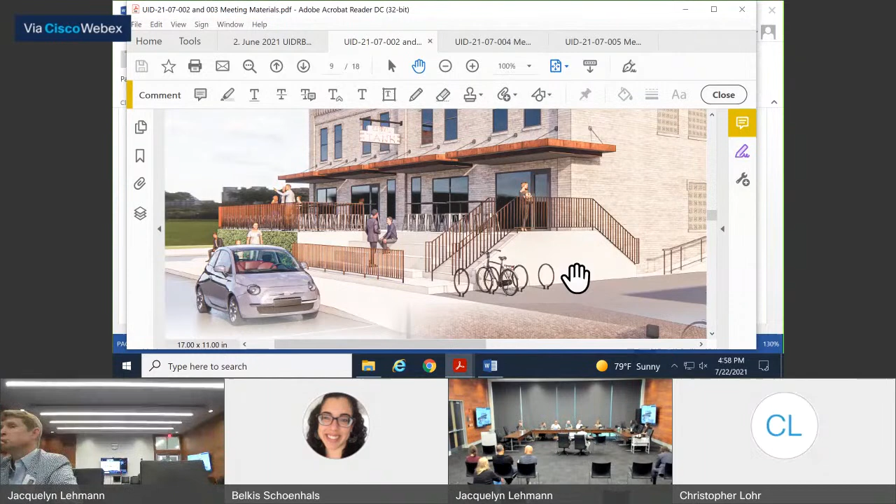So for me, it's ultimately about design, not about politics. And if the architect had some idea that made it better, then I'd be happy to listen to it. But I don't see an idea that makes it better.

David, question? The bleacher seating is not in your... well, that is, I believe it is. But the way it's noted on the plan, it seems that it's left off. I just made a note of that to check. So, because the density of that seating is not consistent with your parking - agreed, agreed. If that square footage was excluded from what was noted on the plan, then it needs to go into the parking reduction at a minimum.

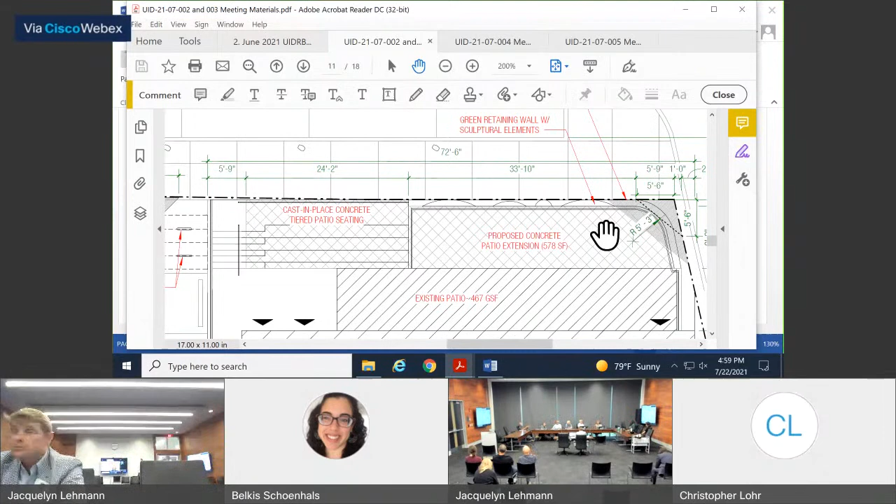Right, but as Frank said, in terms of design, that bleacher seating is totally inappropriate because what you're doing is commanding the inadvertent use of the street, because with that congregation of folks there on that bleacher seating, that's just gonna be really detrimental to that street.

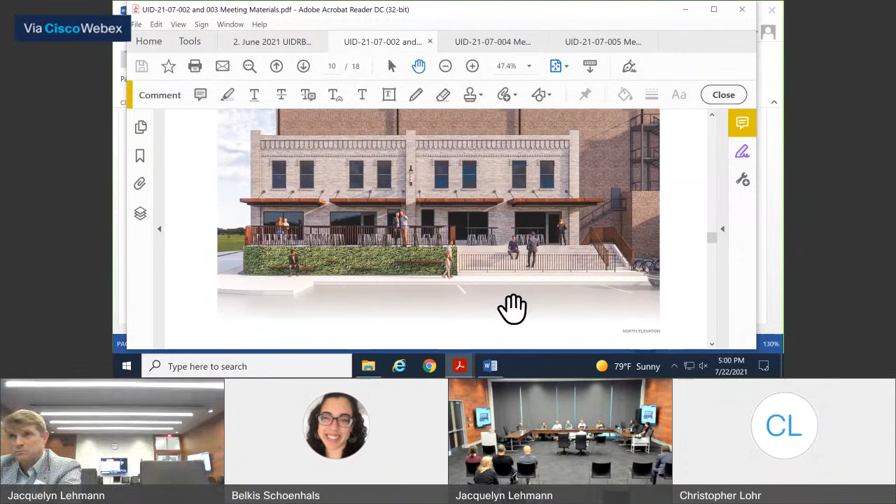I'm going to say I concur with Frank. I don't believe that's the purview of this board to enforce particular specifics of the use that's allowed by the zoning code. So the desire to enforce a fine dining establishment versus a drinking ground bar is not what our purview is. If I look at the language of the zoning code, our purview is to consider the appropriateness of the physical intervention with regard to the neighborhood. And I think Frank put it the right way - right now, it doesn't seem to improve the streetscape. So I personally am open to a design that improves connectivity between retail establishment and the street and does something better than what's being shown. And I don't care about past history.

Keone, and Frank, if I can add to this, I do want to agree with what David said, however, because when the area commission voted, the zoning committee's recommendation for the area commission was unanimously no. But the discussion about design falls to this board. So it was really seen in a different context, and you're right that that was probably a great part of deciding. And it is true that Midway is under an enforcement action for not getting a certificate of appropriateness from this board.

That wasn't Midway, it was the architect. The architect actually came here. They had a building permit issued. The plans examiner missed that it was in this neighborhood and didn't look for the stamp. So they issued the permit. Midway went ahead with the work, and now that's got to come back and get fixed.

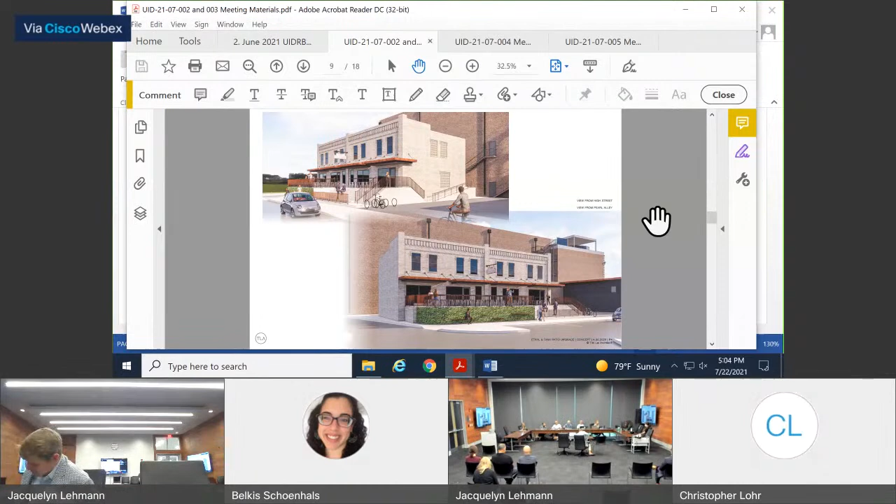Okay, and then I'll call the roll for the variances, to table. Mr. Grado? Yes, to table. Ms. Jones? Yes. Mr. Petrosi? Yes. Mr. Reeves? Yes. Ms. Sauer? Yes. Mr. Plumlee? Yes. Thank you all, great to see everybody, see you next month.

Should I assume the same motion and second and vote for the design as well? Yes. Okay, thank you. UID 21-07-004, 1516 North High Street, Big Bang projecting sign.

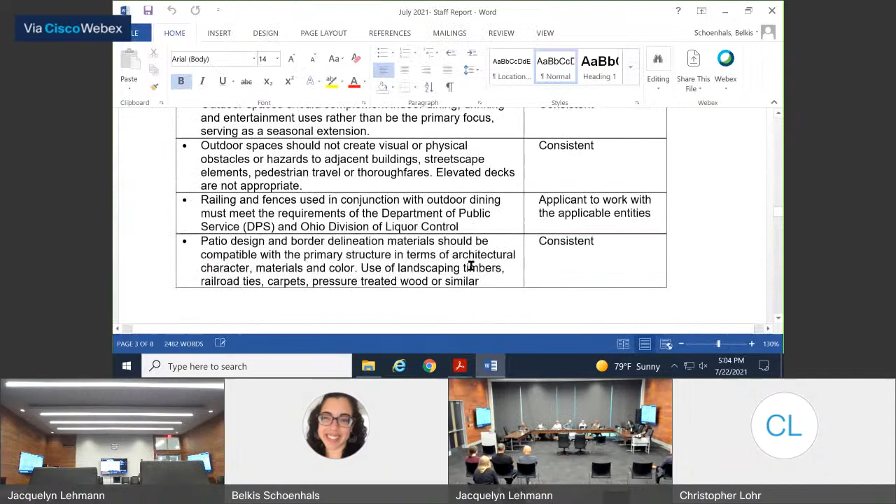Hello, we have an applicant? Okay, so 1516 North High Street is on the corner of North High Street and East 9th Avenue within the High Line at 9 building. It's the former site of Chumley's and will be the new location of the Big Bang Piano Bar.

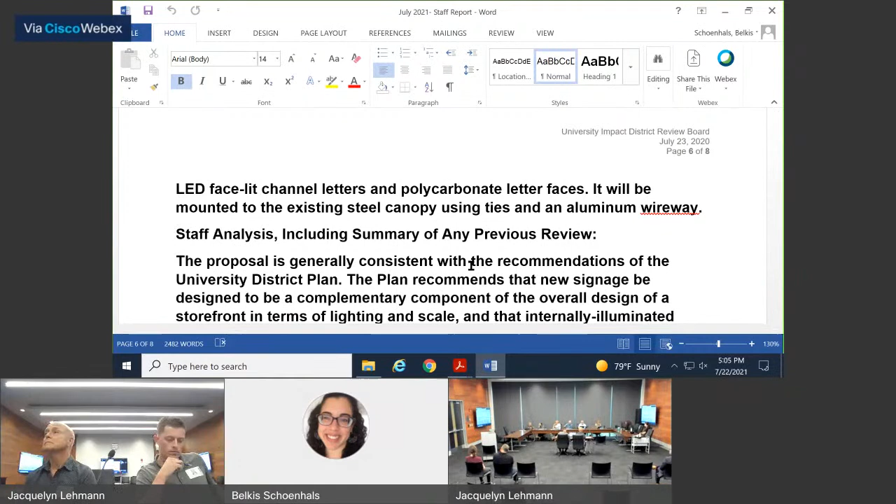The applicant is seeking approval for a new projecting sign and a new canopy sign. The proposed projecting sign is approximately 30.2 square feet with a combination of LED, neon, and fluorescent lighting, a mix of cabinet and channel letter materials, mounted to the facade using a bracket and bolts to a steel stub. The proposed canopy sign is approximately 14.7 square feet with LED face-lit channel letters and polycarbonate letter faces, mounted to the existing steel canopy using ties and aluminum wireway.

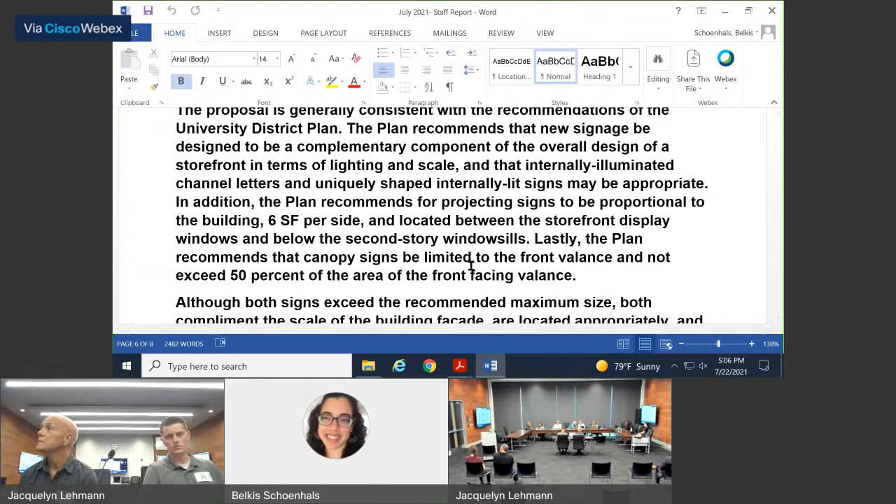After review of the proposal, it is generally consistent with the recommendations of the University District Plan. The plan recommends new signage be a complementary component of the overall storefront design in terms of lighting and scale, and that internally illuminated channel letters and uniquely shaped internally lit signs may be appropriate. The plan also recommends that projecting signs be proportional to the building, six square feet per side, located between storefront display windows and below second story window sills. Lastly, the plan recommends canopy signs be limited to the front valance and not exceed 50% of the area of the front facing valance.

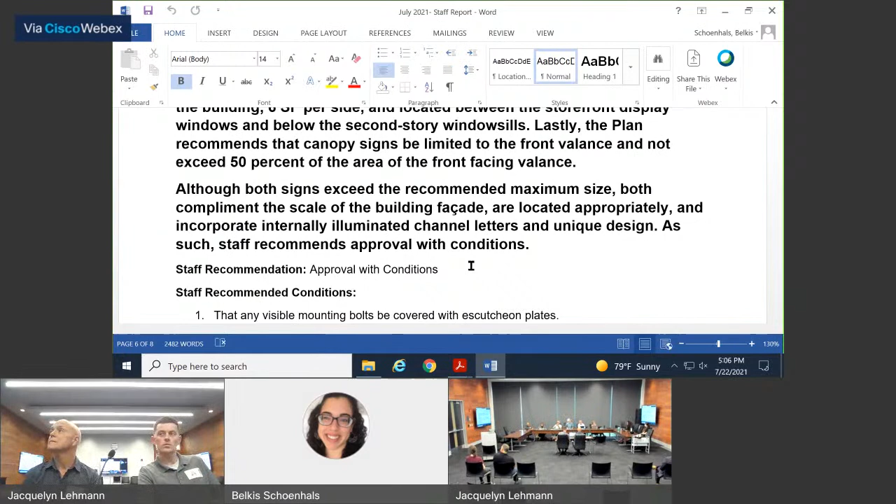Although both signs exceed the recommended maximum size, both complement the scale of the building facade, are located appropriately, and incorporate internally illuminated channel letters and unique design. As such, staff recommends approval with conditions, including that any visible mounting bolts be covered with escutcheon plates.

Thank you, you guys can be sworn in. I wasn't wearing my hearing aids, so I'd just look at you with a blank stare. Okay, have you been sworn?

All right, go ahead. My name is Jared Norton with Morrison Sign Company, and this is Sam Leatherwood with the Big Bang, and we're here to discuss signage at 1516 North High Street.

I'll give a little background on this proposal. The Big Bang was previously located at 401 North Front Street here in Columbus, and they're now moving into the university area. We've designed two signs that we feel will aid pedestrian and vehicular traffic along High Street and 9th. The first sign is the projecting sign.

It's a pretty fun sign, with a little bit of neon and some LED channel letters mixed together for a bright sign. The Big Bang sign is roughly 30 square feet, while the Chumley sign measured roughly 40 square feet. So it's similar in size, a bit smaller, but because it projects out from the building, it'll give more visibility. We felt the Chumley sign kind of got lost on the building, so our goal was to make sure this one is visible to pedestrian traffic.

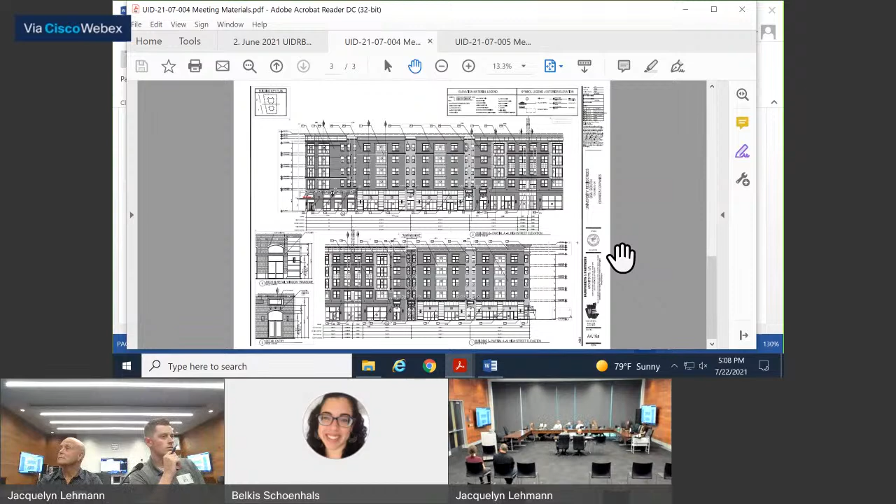Any questions or comments from members of the board? Real neon or LED neon?

It is real neon. I love neon, but I don't love that it gets broken and never gets fixed. This is pretty exposed. I mean, it's not my problem, but I worry about it long term.

Could I address that? I think that sign is about 12 years old, and it currently exists at the 401 North Front Street location. I don't think we've ever had a problem, though that location isn't in the university area. Correct, but this one is higher than the Front Street location, so we have that going for us.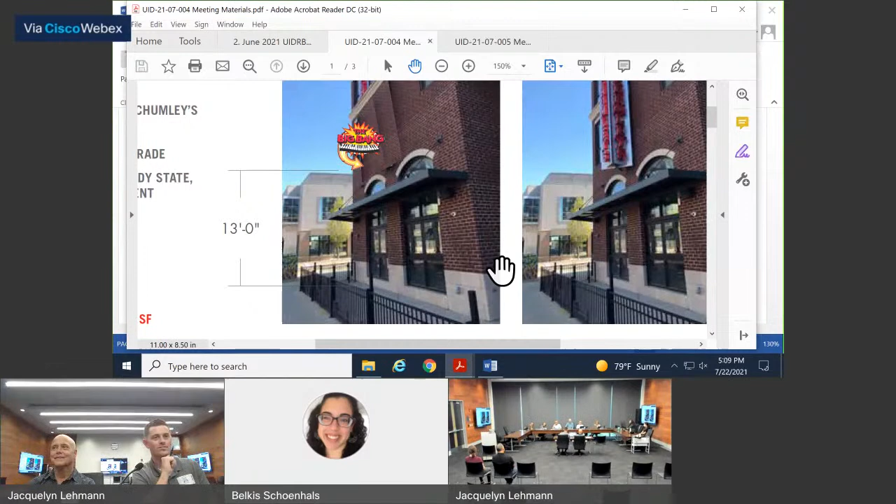I have neon in my own yard at home. It's just a maintenance issue, it's fragile, yes. Do you have a measured drawing looking north?

Because that looks smaller than your dimension. Looking north, the only drawing we have is on that first page, and then our elevations—because of the building wrapping with that awkward corner—that's all we have. Your submission, you don't have a measured drawing of your existing sign that you're relocating on that facade? This is the drawing of the existing sign, right here on the far left side, that's the exact one.

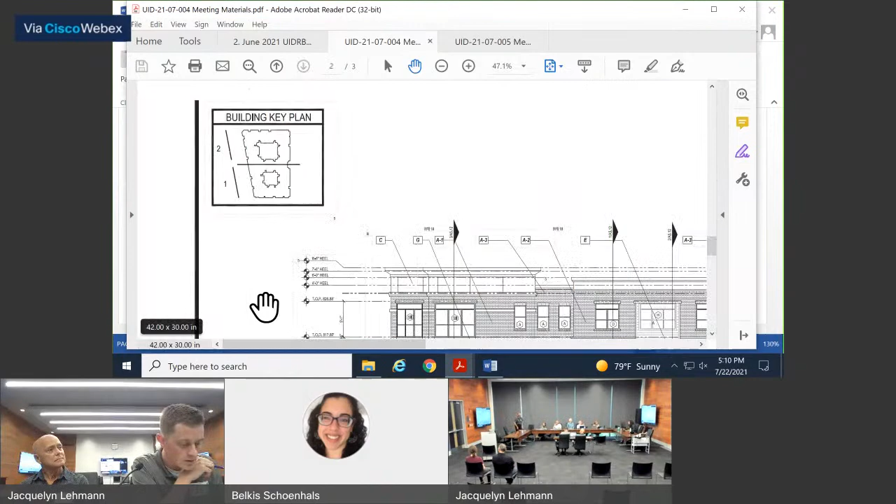But this is indicating 5 foot 4 inches. Correct. Okay, that to me does not appear as 5 foot. For what it's worth, the Chumley sign now is roughly 3 feet, so it looks like...

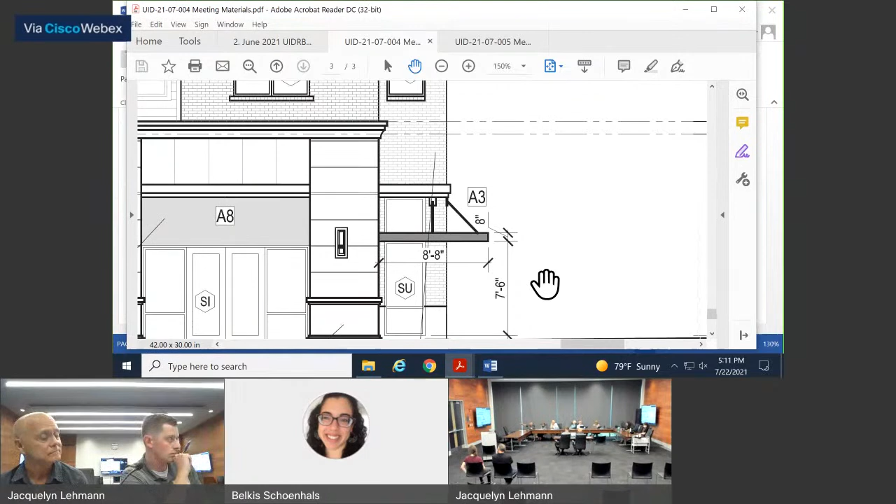What's the overhang? What's the dimension on the overhang? That's listed on the elevation, it may be. If you go to the elevation page, the third page, bottom right-hand corner, you can see that bump out, but it doesn't look like it provides a measurement other than 8 foot 8 inches from the corner. So if that's 8'8", it looks like the left portion from the facade over is around 5 foot, which would mean that it's cantilevered around 3 foot.

Okay, go back to your perspective. All I'm saying is, the way it's delineated, does it project 3 feet beyond? Can you zoom in on it, please? I think the sign follows that line down and then out, see? So this is 3 feet, and when we come down, this is showing it actually bigger—at least 6 feet up from the building—so it's showing it bigger than the sign actually is.

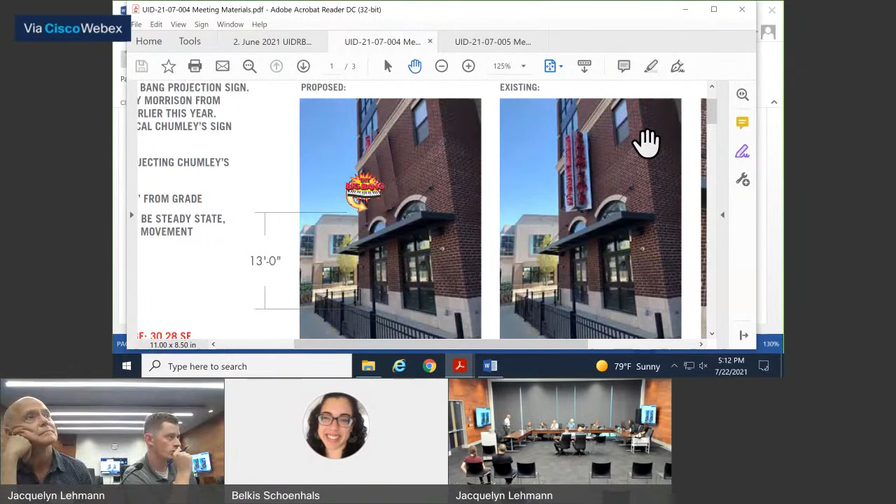Maybe it's replacing the Chumley sign, which was large and not particularly attractive. This one's sort of more charismatic. I'm just looking for the accuracy of the presentation. No, I'm with you.

Yes, and this is staff—I did ask the applicant to provide a to-scale and dimensioned elevation, and I did just get those two sides, but I double checked that the scale and measurements were accurate. I noticed it was maybe a little on the bigger side, but I'd rather it look a little bigger than too small.

Thank you, and as you noted, this is an existing sign you have installed. That is correct, and I'm good with it. Any other comments or questions? No. I move to accept. Okay, I second. All those in favor, second.

So to call the roll on the application: Mr. Fleming, yes. Mr. Grado, yes. Ms. Stones, yes. Mr. Petrozello, yes. Mr. Reeds, yes. And Ms. Hufsauer, yes. Thank you.

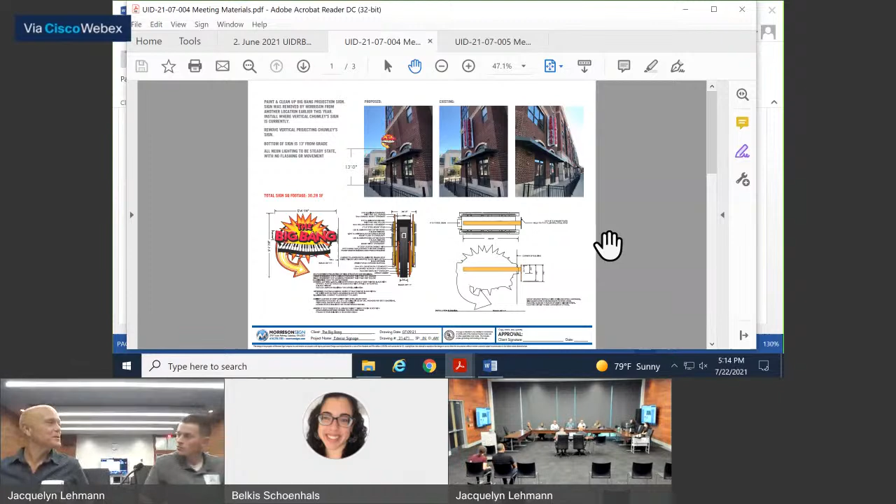Thank you all for your time. Nice to see you in person. Can I ask you one last question? So the channel letters are okay too? Above, okay, great. Well, thank you so much. Yes, thank you.

UID 21-07-005, 1230 North High Street, Out of the Closet. 1230 North High Street is located at the northeast corner of North High Street and West Fifth Avenue.

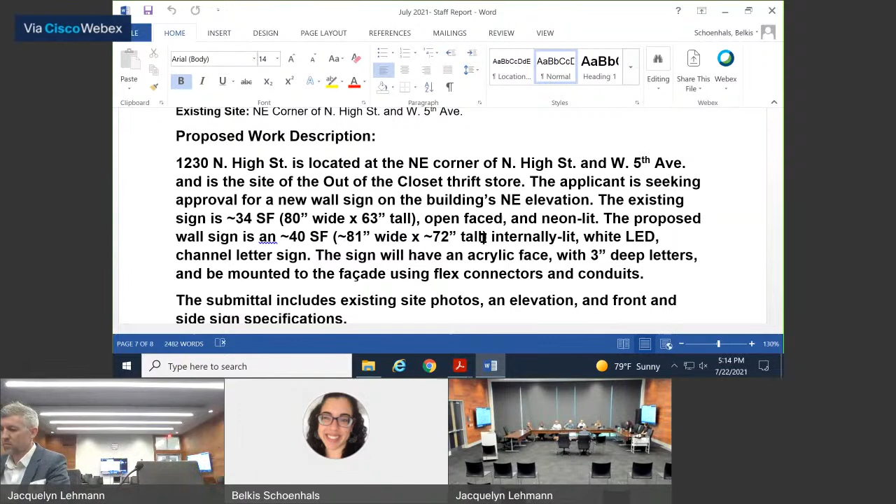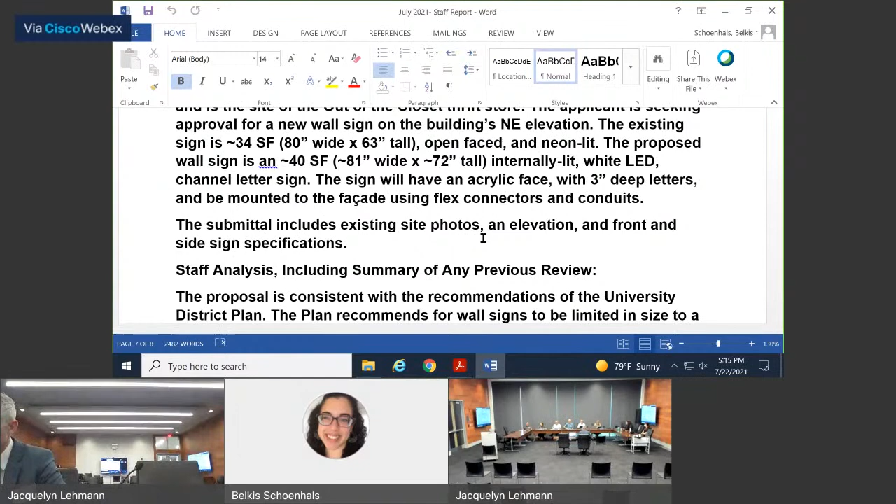It's the site of the Out of the Closet thrift store. The applicant is seeking approval for a new wall sign on the building's northeast elevation. The existing sign is approximately 34 square feet, open face and neon lit. The proposed wall sign is approximately 40 square feet, internally lit with white LED channel letters. The sign will have an acrylic face with 3-inch deep letters and be mounted to the facade using flex connectors and conduits. The submittal includes existing site photos, an elevation, and front and side sign specifications.

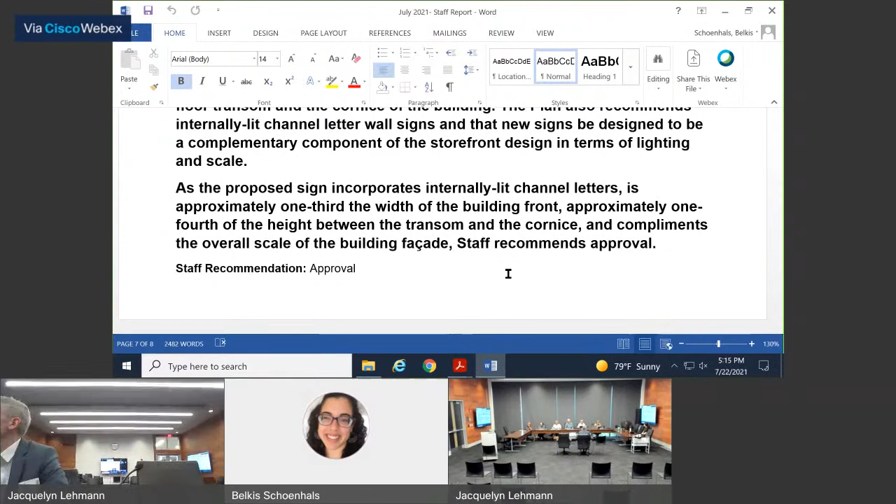After review, the proposal is consistent with the recommendations of the University District Plan. The plan recommends wall signs be limited to a maximum width of 2/3 of the building front and a maximum height of 1/3 of the space between the ground floor transom and the cornice. It also recommends internally lit channel letter wall signs that complement the storefront design in terms of lighting and scale. As the proposed sign incorporates internally lit channel letters, is approximately 1/3 the width of the building front and about 1/4 the height between transom and cornice, and complements the overall scale of the facade, staff recommends approval. Thank you.

Have you been sworn in? No. Raise your right hand, please. Do you swear the testimony you're about to give is the truth, the whole truth? I do. And you must tell us about your application.

Sure, I don't have a whole lot to add. I'm Darren with Sign Vision. The sign is essentially going to be the same for the Out of the Closet part. They are going to channel letters instead of the open face neon. But they do want to add 'thrift store' because people struggle to know what they are. You could eventually deduce it from the word 'closet' and a hanger, but they want to add 'thrift store,' and that's really the only change, going from neon to LED facelit channel letters.

Questions? I'm gonna miss that neon hanger. Oh yeah, we might be able to give that to you.

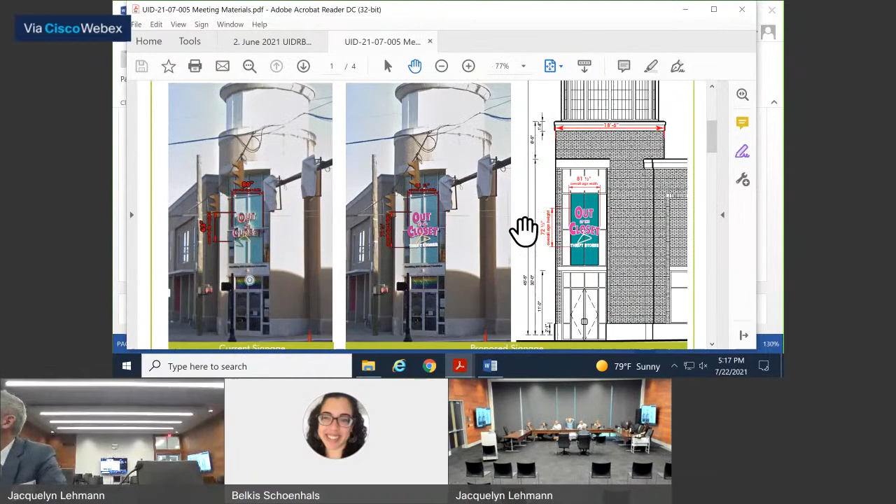Is that before and after there? Yes. Two images. So I still see a hanger. There is still a hanger. Yeah, the Out of the Closet name and the hanger are the same size. They're just adding, since they don't want the neon anymore, that's going to be channel letters now, and then they want 'thrift store' as an added description so people know what they are. So it's still Out of the Closet and the hanger staying the same, just going to LED letters.

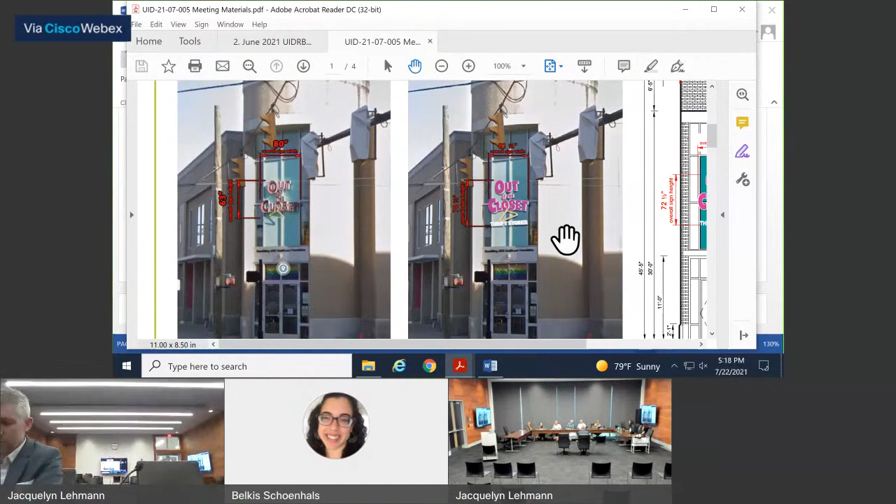Having solved that, would you like to make a motion? I move to accept as presented. A second.

I'm going to call the roll for approval. Mr. Fleming, yes. Mr. Grado, yes. Ms. Jones, yes. Mr. Petrozello, yes. Mr. Reeves, yes. And Ms. Newbox-Sauer, yes. Thank you.

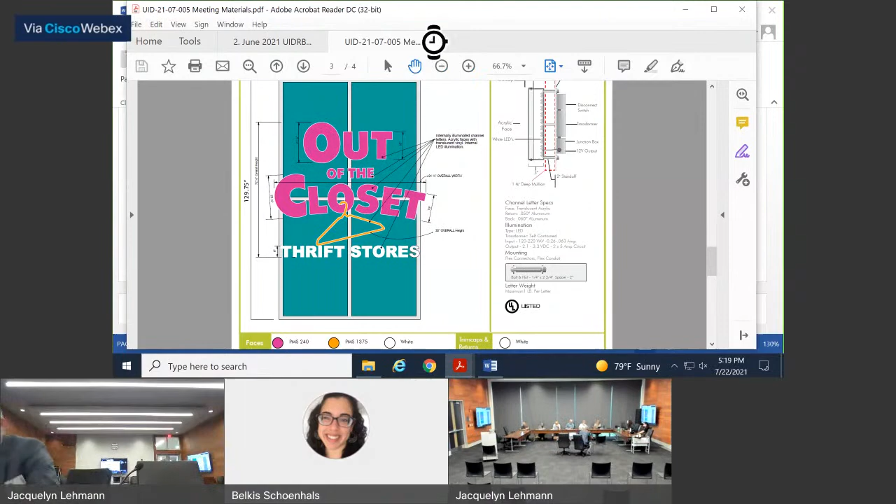Mr. Chen. Okay, staff approved applications, the storefront door, anything we need to hear? No, it was like for like. Okay. New business, old business? No, okay.

Motion to adjourn. Second. All those in favor? Aye.

We're done. Look at this, it's on 20. Holy cow. I know what we're gonna do. Yeah, I know, we're still recording and live streaming. I know. Goodbye, YouTube. Good night.